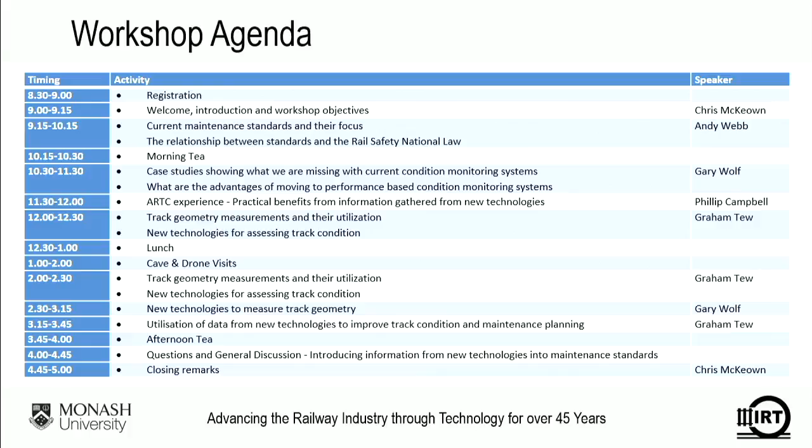Good morning everyone, welcome this morning. I'll try and speak loudly, so if you hear my voice drooping a little, just wave your hand and I'll try to pick it up again.

I've got some slides. Do we have a control? You can use this microphone if you want. Also, do you have a remote? I think there must be a remote on the other side. Just check... No, we don't have one. Okay, so you might have to use this one. I'll hold it because I think I'll have to hand it on to the next speaker.

Okay, so I'm just going to talk a little bit about my function and about the objectives of today's workshop to start with. I won't talk about the program because Ravi's already had the program up.

The Chief Investigator Transport Safety is an independent agency established under the Transport Integration Act Victoria 2010. We investigate rail, maritime and bus safety incidents in Victoria. Rail incidents in particular are investigated under a collaboration agreement with the Australian Transport Safety Bureau, and the reports are published jointly with the Australian Transport Safety Bureau. So we work very closely with our federal agency.

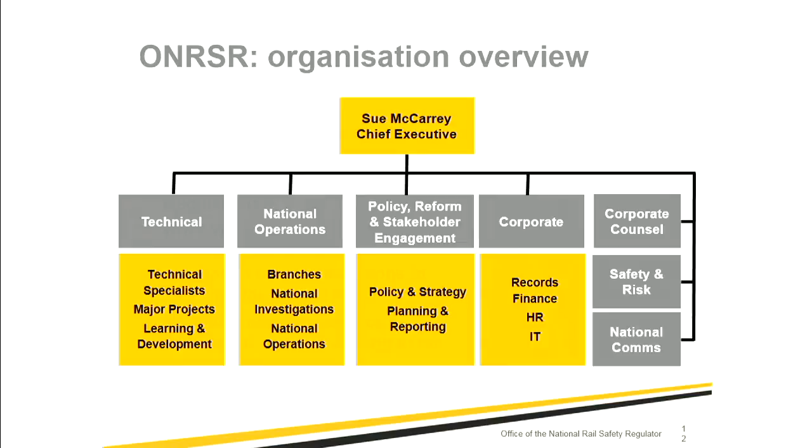So what do we do? Now, there are some key functions that the regulator performs, and these are not functions that we all sat down and thought would be a good thing for us to do. These are functions legislated within the Rail Safety National Law. So the regulator's functions are to administer, audit and review the accreditation regime - that's the process by which railway operators are allowed to do railway operations.

We have to work with rail transport operators, which will be a lot of people in the room here, and rail safety workers and others, to improve rail safety nationally, and conduct research and collect and publish information. We also provide or facilitate education and training.

We're also here to monitor, investigate and enforce compliance with the law, and at times you might see some of the rail safety officers out undertaking audits and inspections. And also to engage in, promote and coordinate sharing of information relevant to rail safety, which is probably one of the reasons I'm here today.

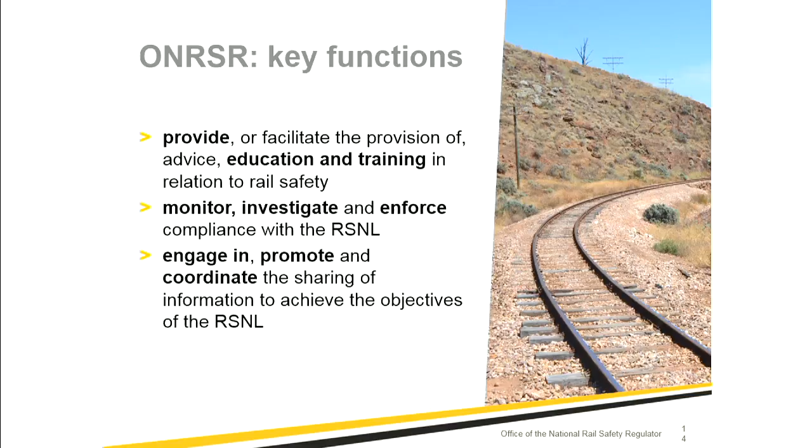So what's our approach? Understanding our approach, I think, is important to put into context the rest of the discussion that I'll be having just now and perhaps for the rest of the day. But the regulatory approach as we deal with industry is...

We aim to be independent and impartial. We aim to be risk-based, where our activity should really be focused on the areas that have the highest potential for creating safety risk, or the highest potential for seeing safety improvement. Our engagements with industry, we hope, would be educational, and we feel it's also important that our engagements, particularly with compliance and enforcement, are proportionate to the risk that is currently being addressed. And we should be transparent, fair and accountable, but importantly, consistent.

And I think that's one of the messages the industry was keen was implemented as part of a national regulator, that wherever you are in the country, the response and the reaction from the regulator should be the same for the same type of problem with the same type of scope.

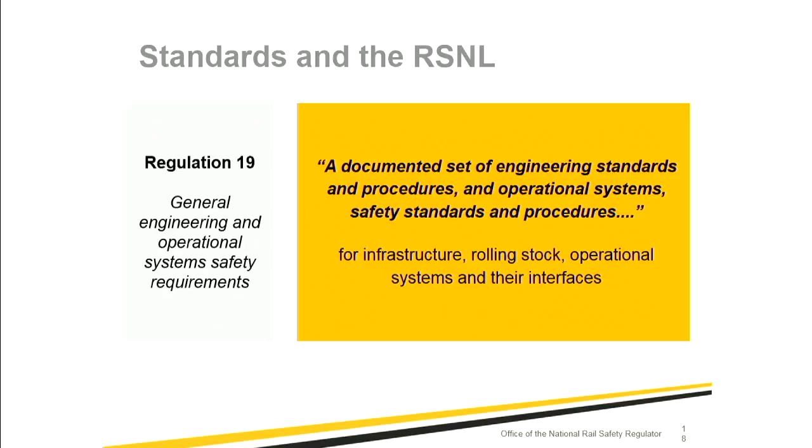And the second half of that regulation moves on from having the standard to describe the what, to having the standards and the process to describe how. So systems and procedures and standards for infrastructure and rolling stock that cover the asset life cycle from design through to decommissioning.

So yes, it's important to have the maintenance standards, for instance, that will describe what you might look at and examine, but you also need the processes surrounding that to ensure that that standard gets implemented and delivered. It's just to think on two fronts how that is done.

So effective standards. What are effective safety standards? Can we take the assumption that standards have been written, we've got all the documentation that we need, and that they comply with Regulation 19? So tick, tick, tick, we're all good to go.

Well, not necessarily. We have to ensure that our standards are effective and are implemented effectively to ensure safety.

And the example I gave at a previous presentation, and apologies for those that might have heard this before, but it's an event that stuck in my mind. But a few years ago, in fact probably many years ago, I was working in Dublin with Irish Railways, and we were delivering a number of things, one of which was level crossing upgrades. So level crossings were being upgraded and all of that was ticking along okay.

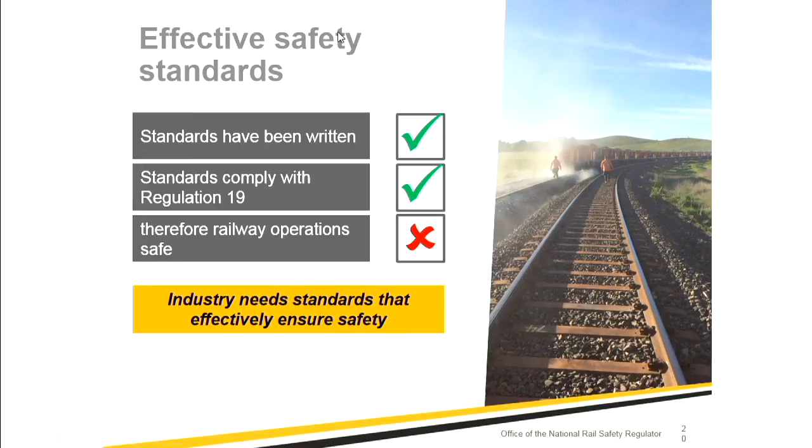So within the week, the correct signs were back out there. But the message there is, you can have the standard, but are you using it effectively? Are you aware of its limitations? Yes, we can tick off that we've got standards that comply with Regulation 19, but that doesn't necessarily mean our railways are safe, particularly if you don't have a colour photocopy. So just think about how effective your standards can be.

But in reality, some of the key features of effective safety standards apply across the asset life cycle. Ideally there's risk-based development behind them, so we can understand, at least from the regulator's point of view, what safety risks might be controlled - there'll be other risks in there too. There should be a clear and accountable development governance to the standard. They should share good industry practice. They should be subject to continual improvement and review, and in so many parts of our professional lives, continual improvement should always be there.

And again, I think that's one of the strengths of forums such as this, where we come together and think about what's out there - how can we do what we're doing better, or can we learn from someone else?

Standards are a useful way of documenting safety so far as is reasonably practicable type controls. And these controls should support the hierarchy of control mechanisms, and standards should also have clear decision-making accountabilities. At times, we need to intervene, we need to make decisions, and it should be clear as to who does that.

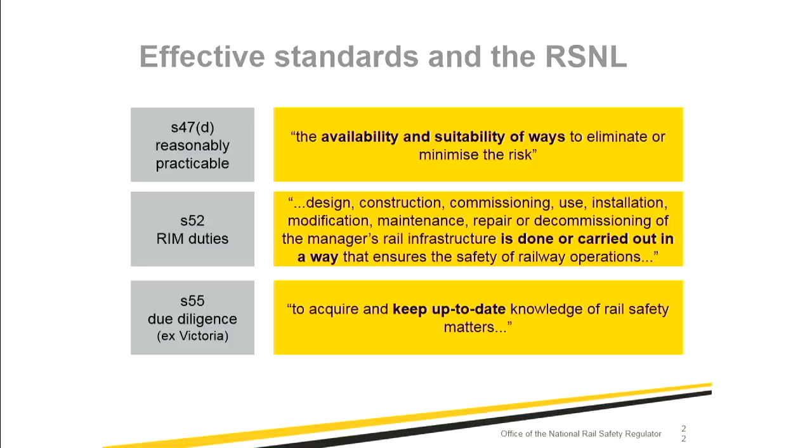Now, from the regulator's point of view, risk there is really safety risk, but I'll admit the world is slightly bigger than the regulator's core interest. Cost, risk and performance - that comes back to the messages behind ISO 55000, the asset management standard. And if you're looking at maintenance, you've got to work out all of these and how you balance them together. Certainly from the regulator's point of view, they're interested in failure consequence and that risk side, particularly safety. But have you thought about the asset's environment? Are our maintenance instructions and approaches efficient for the maintainer? If we're spending a lot of time doing something that doesn't add value, could that time be better spent doing something more useful elsewhere? I think these are the sort of questions to be thinking about.

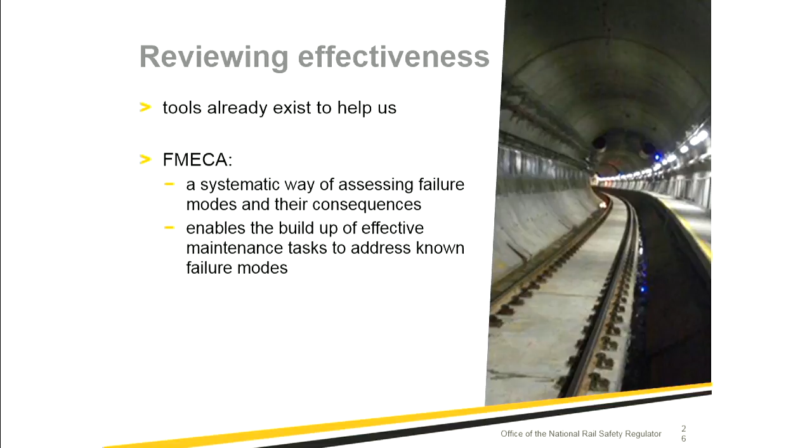So hopefully the slides will work here. It's maybe a bit small. I'll try and talk to them. But there, at the beginning, is really about understanding what assets you have, how they contribute to your business, and what they do. Unless you've got an understanding of that - in effect, the context that our physical assets are in - it's going to be a bit of a struggle to work out what you should be doing to them to keep them safe and reliable.

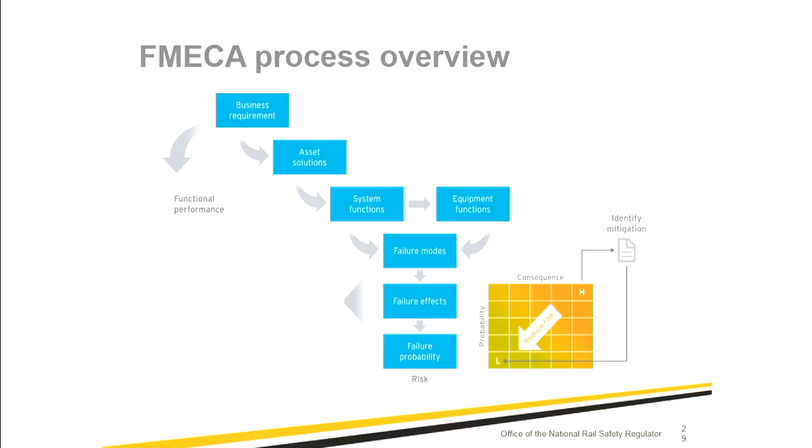So off to the right-hand side there, we can see our typical risk matrix, where if you have a high consequence, high probability type risk or failure mode, you can identify mitigation that will reduce the risk. And in this instance, the mitigation that we might look at is maintenance.

What maintenance are you going to do to reduce the risk of that failure mode? So when we're looking at new technologies, when we're looking at smarter ways of doing maintenance, how are we reducing the risk of failure? That's key, I think, to what we should be thinking about.

And when you've started to identify these things, then you can find operator actions, maintainer actions. You may have to go back and redesign. But the operator and maintainer actions is our maintenance plans. And going through that systematic process then helps you identify the maintenance activity that you may wish to do.

So a FMECA can help support safe assets because it helps you identify maintenance activities, helps you identify operational activities you should do, and helps you communicate the assumptions behind existing practices, because it gets you systematically thinking about things.

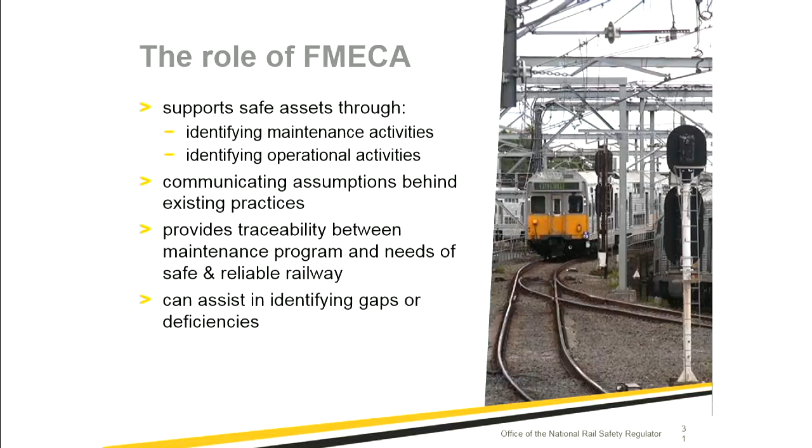Again, asset management, I was alluding to the how of doing maintenance. We have asset management plans, and asset management plans will cover things such as the management of risk, knowing or being comfortable that our asset hazards are identified and controlled.

Some of the control there can be in the documentation, that we have instructions and processes to ensure that our maintenance is delivered. With our actual assets, that their safety performance measures are known and managed, that we've got training and instruction for our staff, and that everyone is competent in what they do. That is, in a quick summary, what might be part of an asset management plan.

What maintenance standards and instructions will contribute to. That asset management plan is a requirement of a safety management system, which is a requirement under the Rail Safety National Law too. So again, there's this connection back that what you're doing today, what you're thinking about in terms of maintenance instructions and standards is fundamental to ensuring that you deliver a safe railway that is compliant with our national law.

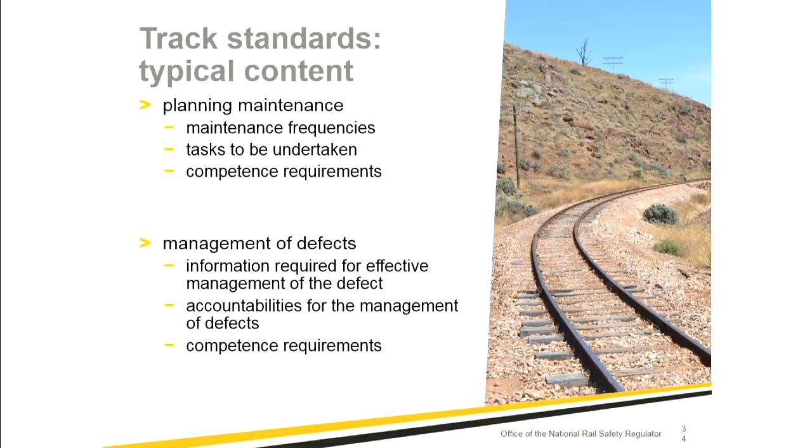So, safe delivery. I didn't just want us to concentrate or just have that focus purely on the technical nature of it, but I do appreciate that's going to be important for today. But we do need to think about how it fits in overall.

As a railway, we may be track engineers today, but there are a whole host of disciplines out there, and the railway is a complex system. A wide variety of disciplines, an even wider variety of technology, and assets at a whole stage throughout their life cycle. And we need to be managing the safety risk, as I've said. You need to be managing condition, you need to be managing interfaces, budgets, people. The whole thing is complicated.

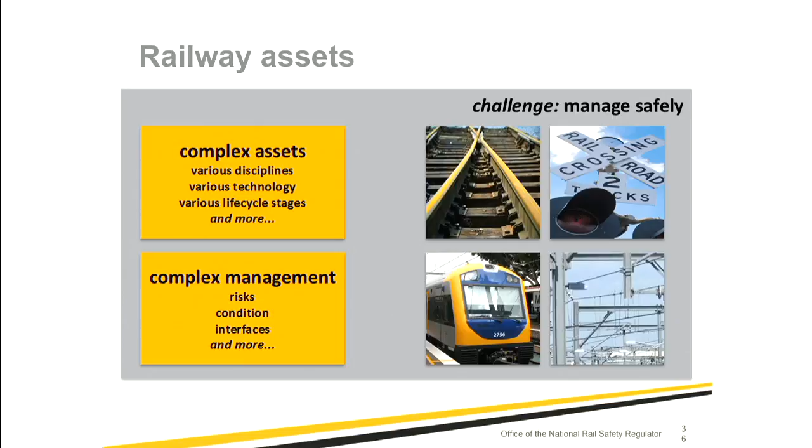And how do we do that safely? It comes back to our asset management and asset planning approach.

So a safe approach, yes, I think it's appropriate that you focus here today on track standards and the engineering behind them, but we do need to think that all assets have to work together, whatever discipline an engineer is responsible for them. We have to be very aware of these interfaces, and we've got to think of the railway acting as a system as a whole.

And a safe approach includes understanding risk, being aware of what the safety requirements are. That doesn't mean just legislative requirements, but what are the safety requirements on your asset? What performance does your asset need, if you're looking at maintaining it a different way, what are the safety requirements? What's the rest of the railway expect your asset to deliver?

And stakeholder requirements, which might come back to some more of the business drivers, as I was explaining earlier, that cost, risk, performance juggling act.

So the asset life cycle is worth thinking of too, because when we're looking at maintenance and asset life cycle, there's lots of ways of drawing that. Again, I think this one's taken from the Asset Management Council. But you plan, you design your asset, you acquire it, you build it, and then you operate and maintain it.

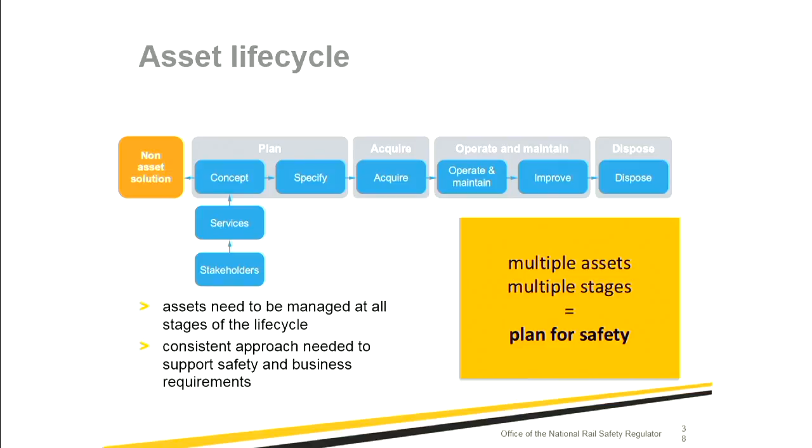Another example I thought I would share with you. This was a story where a coal train was leaving a yard empty. A handbrake had been left applied to one wheel, and the operator failed to spot the defect.

These things happen, such is life at times. So the train wheel slipped along the track as the train progressed empty to the coal yard. And when the wagon was filled with coal, the wheel locked on the return journey.

So the locked train wheel caused the laden wagon to derail at a junction. The resulting derailment damaged the rail system as a whole. So the wagons were damaged, track was damaged, signalling was damaged.

Operational disruption was somewhat scary. Ships were delayed at port. The estimated consequence of that one failure was about $10 million.

That was based, that's a true story, but the scenario happened twice at the same location within one month.

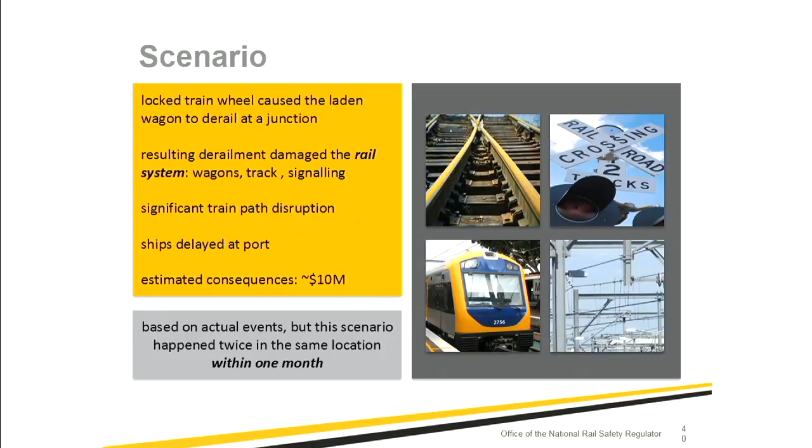And it's thinking about what are we doing in terms of maintenance? How are we responding to these items?

So there was a new piece of kit designed to detect should a wheel be locked. But one of the messages here, I think, is when you're looking at your assets, a failure in your asset

can have consequences in other people's domains within the railway system. A failure on a wagon

created problems for the rolling stock engineer, created significant problems for the track engineer, created problems for the signal engineer, and did not make the operations manager a happy man twice in one month, assuming we are ever truly happy.

But our approach to maintenance, and again, when you're thinking about maintenance today, think about how reliable and safe track assets contribute to the rest of the railway, and not just within the confines of the track engineer.

So nearing the end, we also need to be aware of how everything fits together, how you manage your asset. Know the interfaces between assets, between asset groups.

Understand that maintenance and your standards should be supporting your assets being fit for purpose.

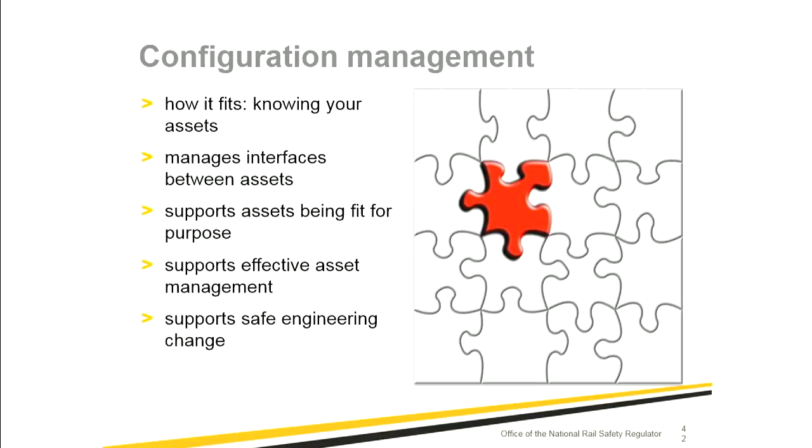So, know your safety requirements, know how your requirements are managed throughout the asset life cycle,

know how you manage your asset risks, ensure you've got the information that you need, and how you interface with other parts of the railway.

So that really brings me to the end of what I was looking to talk about. We've had a quick skip through the ONRSR, who we covered, the changes coming up in New South Wales and Queensland about to join us, what the regulator's here to do.

But I hope I've given you a foundation for the rest of the day to have at the back of your mind that what you're doing is important, it's critical for compliance with rail safety, and ultimately that's why we're all here.

And some of the things to be thinking about in terms of maintenance standards, to ensure that maintenance standards and how we do maintenance is effective and safe. Thank you.

Just put this slide. Can I turn off these screens so I can just do it here? The thing is, these screens are linked to that, so you have to look up there. Okay, so, beautiful, so you have to do it up front if you don't want to. No problem, I had trouble because it was echoing, yeah. You've just got to make sure the microphone's not... see, we're getting feedback from these speakers. Maybe if you step back towards the wall. Yeah, maybe back there. How's that, try that? I think you're still getting feedback. No. No feedback? No, no feedback. If you stand good there, back there's fine, no feedback, isn't it? No feedback from there, it's much better. Yeah, it's still yeah. It's poor acoustics in this room, they can't do anything about it. But there is a microphone here, try this one, but the only thing is you're going to be blocked off by that. Yeah, and you know, when the speaker stands behind here, you can't see the speaker. How's that, is that better? Yeah, that one down, oh, it's a design that somebody has done without even realizing. How is that? Yeah, so you might be able to.

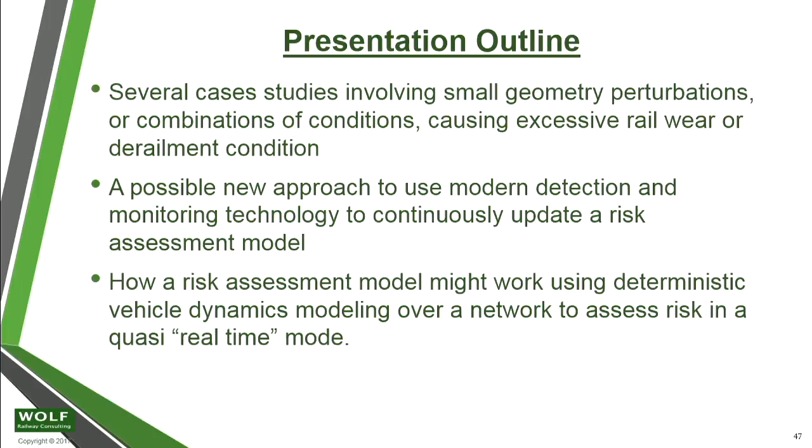The first derailment I want to show you was a loaded box wagon operating over a highly elevated curve. I won't get into all the reasons why the curve was highly elevated, but it had something to do with past experience with passenger trains on that corridor needing higher elevation for their speeds versus freight speeds, which is a common problem in many areas.

The curve elevation reached about 7 inches, or 178 millimeters—you'll see in a moment with the graph. The curve also moderated at the same location, so we had an increase of elevation and a lessening of curvature. The train was operating at 10 miles per hour, roughly 15 clicks, considerably under balance speed or design speed for the curve.

The higher elevation was due to pumping—mud, obviously—from the low rail side. So when the low rail goes down, the high rail goes up in relative terms, and the elevation increases. That's what was occurring. Also, the curve had corded in during the winter: when the rail contracted and the ballast was weak there, it pulled that curve inward. That's why the curvature changed as well.

As I said, none of the track conditions constituted a regulatory defect. Of interest, the first derailed car in this train—maybe 50 or 60 cars—the one car that came off at this spot had a slightly off-centered load. Now, we can sit back and say, well, there's the cause—the load was off-center, an inch or two from center of gravity. The problem is, that's a reality we should recognize in our world. When we set a standard, we should accommodate an off-centered load—not to a great degree, but minor offsets ought to be considered in how we look at standards, and not assume every wagon coming down the railroad is perfect. I think that's one of the fallacies when we look at standards.

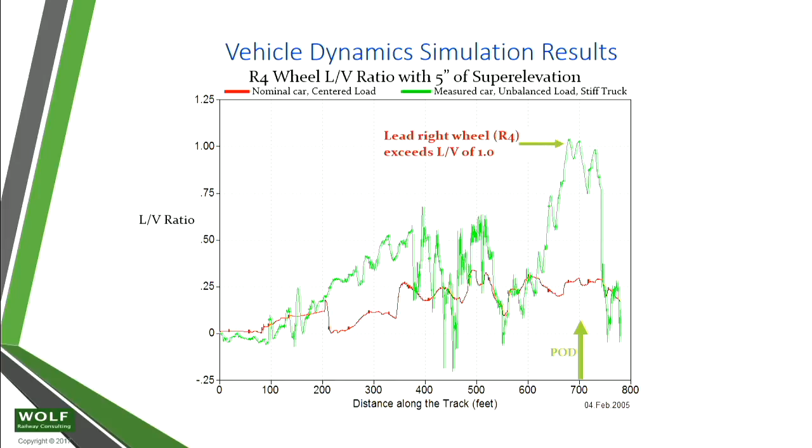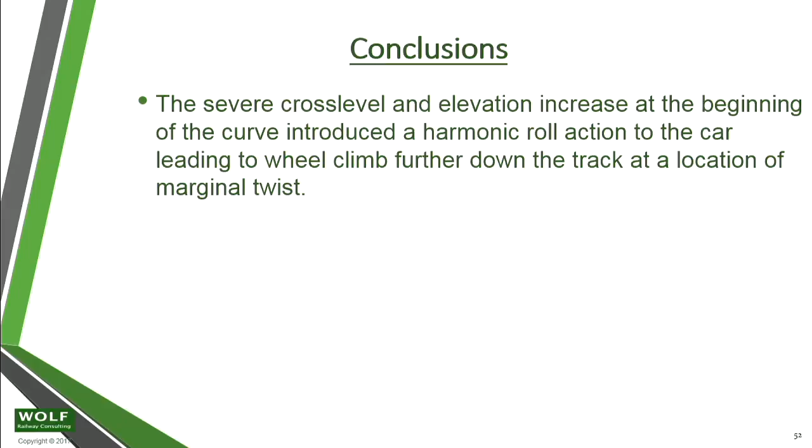So the severe cross level and elevation increase introduced a harmonic roll action leading to wheel climb further down the track at a location of marginal twist. If the car did not have an unbalanced load, the derailment would not have occurred. And if the curve had been elevated to a nominal 1 inch, the derailment would never have occurred. 1 inch elevation would be normal for this degree of curve and a 10 mile per hour speed.

So here we have a condition where we met the standards, but we put ourselves at an unacceptable level of risk, I think. So combinations of conditions, none of which are condemnable, can lead to derailment.

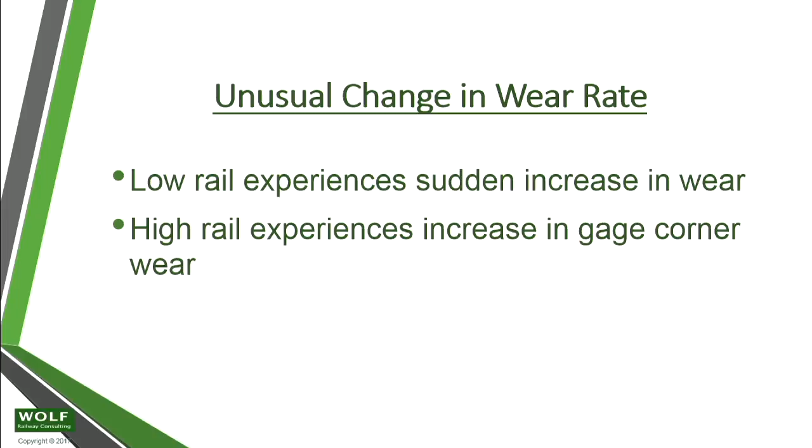Now this is not a derailment, but we did some work for a particular rail operation looking at rail wear, and in looking at some data we came across the fact that at one spot we had the low rail of a curve experiencing a sudden increase in wear, and the high rail gauge face also experiencing a sudden increase of wear. This was in a curve, and all of a sudden at one location we had these two blips of increased wear rate.

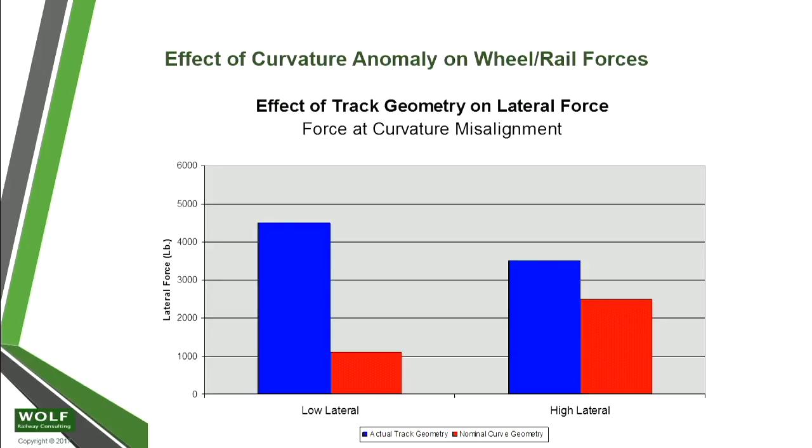So we ran some simulations with the vehicle dynamics model, and here's what we saw: with the actual track geometry, with the curve variation right there, we saw a large increase in lateral forces on the low rail, as well as the high rail, over what I'd call normal geometry, smoothed out without that abrupt curvature change. And by the way, that was not a regulatory defect either - it met all the standards, but it caused a huge degradation of our asset here.

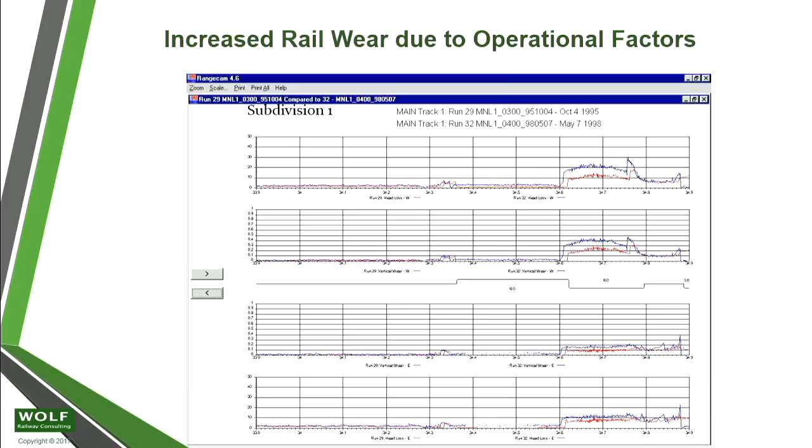Here's another case where we were looking at rail wear conditions, and all of a sudden we noticed in a certain area over several hundred meters a rapid increase in especially the low rail wear, head loss occurring over 2 successive intervals of measurement. And also in concert we had a number of areas of rolling contact fatigue on the low side of the curve. So we wanted to take a look - why did that area stand out in its wear rate? What was unique about it?

What we found was it was on a downslope, loaded trains coming this way, and they were often slowing in this region for a meet at this crossing loop right here. So trains were slowing down coming into this meet location, and the curves back up here were experiencing trains operating significantly below the planned speed limit.

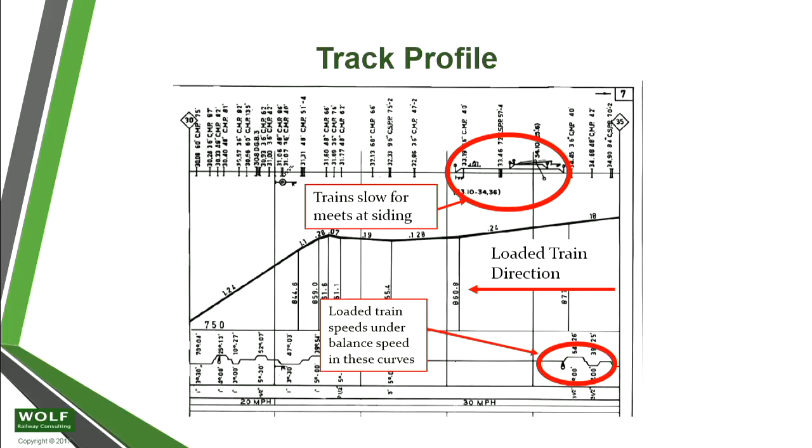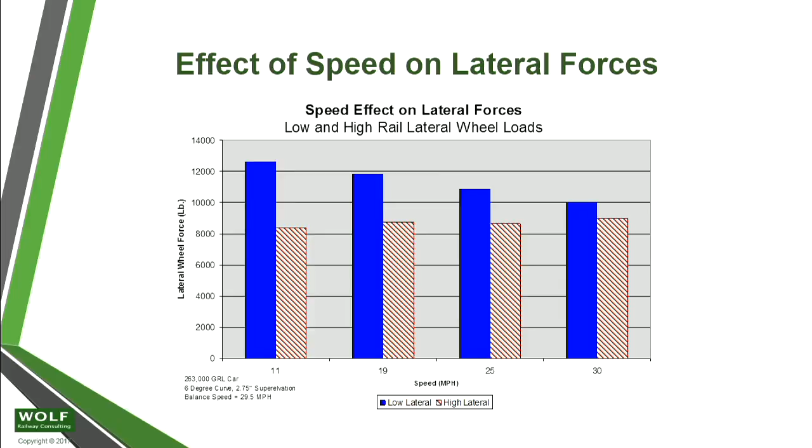It also affected the lateral forces. When you operate significantly under balance speed, especially on the low side of the curve, your lateral tread creepage forces increase with increased normal force, and that explains some of the tread wear issues as well.

So we have two case studies here. One shows the direct influence of a sudden, non-condemnable change in geometry that causes higher than normal wheel set forces and wear. The other shows how train operating parameters can also influence the condition of our infrastructure if we're not taking that into account.

These studies show why we can't ignore even subtle changes in geometry, or we risk the development of adverse rail degradation. The problem is we're not detecting these changes. The geometry car goes through, gives a clean bill of health, no problem — but then we see the results of some of these changes that we're not picking up.

This one involved three high-speed box wagon derailments. These were 60-foot wagons, roughly 20-meter wagons with swing motion trucks. They were derailing at high speed, about 80 miles per hour, which would be roughly 125 kilometers per hour. The three occurred over about a four-month period.

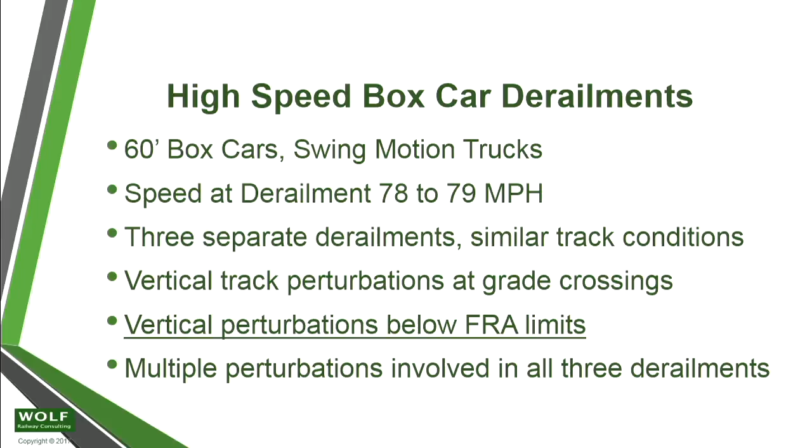They had similar track conditions — vertical perturbations near level crossings. Importantly, they were below the FRA limits. Geometry cars didn't flag them in any of the three instances, yet we had significant derailments at all three places.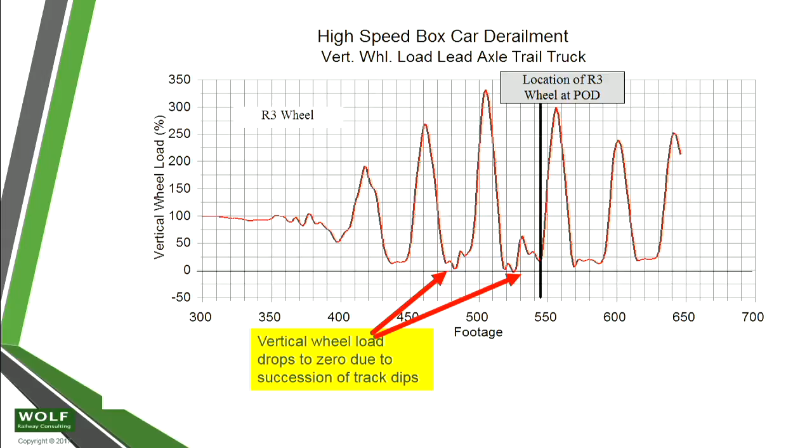So again, small track surface defects, borderline regulatory defects, multiple perturbations in a row — a single perturbation would not cause the derailment. You need that combination. While the static measurements may meet the standards, the dynamics do not. And again, lack of corrective surfacing or grinding leads to these worsening conditions.

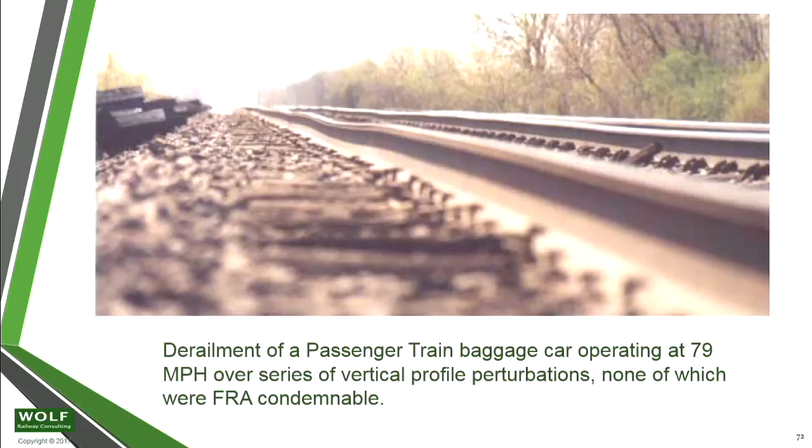Here was a passenger train derailment, a pretty famous one in the U.S. that made the newspapers about 10 years ago. This is a view — I'm laying down at the level of the track trying to shoot these vertical perturbations. We had three in a row. The train was operating at about 80 miles per hour, 125 or so kilometers per hour. It hit three of these perturbations, and although they look kind of ugly here, they were not regulatory condemnable.

So we had these dips, about a 1 3/4 inch maximum was the worst dip, but the regulatory maximum allowable was 2 inches. So again, it wasn't flagged for either vertical or cross level. We were close, but not in the condemnable range.

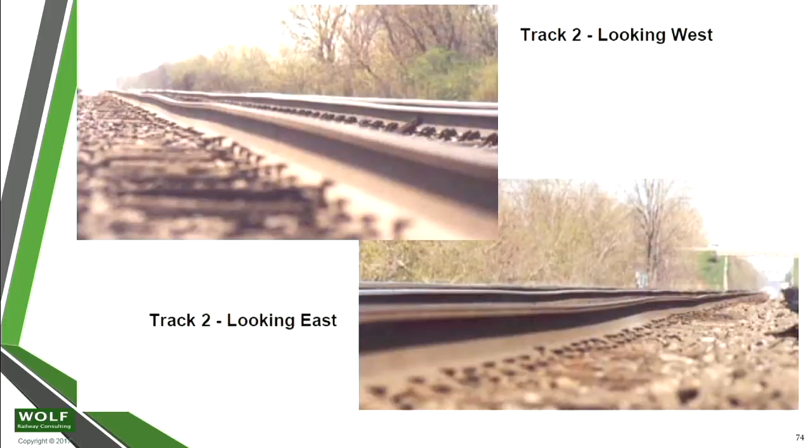And here again is looking both east and west of the site, and you can see the vertical top looks pretty ugly, but it met the standards.

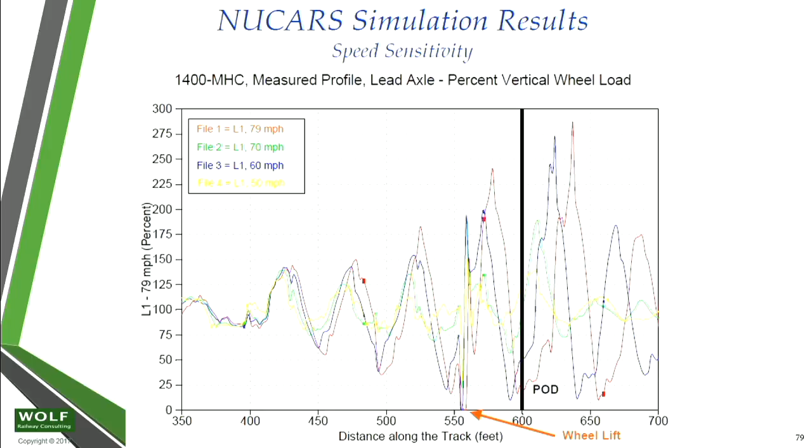So again, not to beat a dead horse, but we had these 4 dips right in a row. A singular dip would not have caused this derailment. The cross-level twist on top of it. So here we had combinations, again, of non-condemnable measurements in combination with speed initiated a major derailment of a passenger train and numerous injuries. Not a pleasant situation by any means.

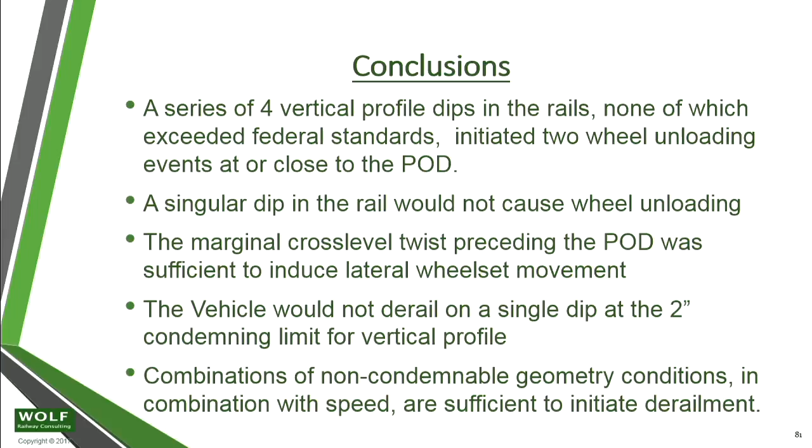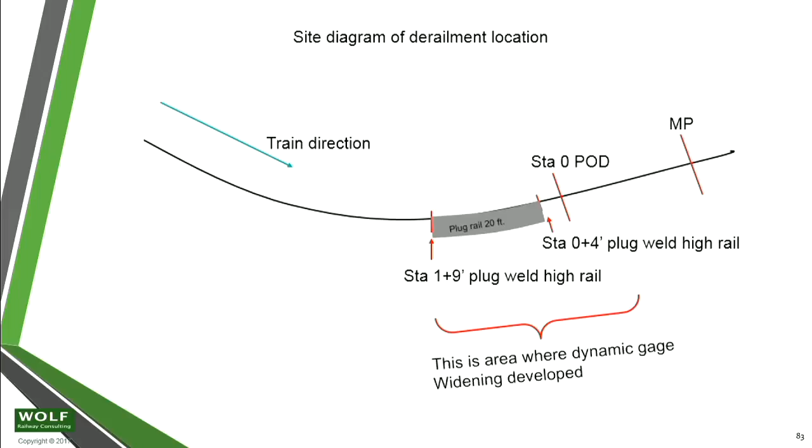So, right where we had this plug rail, right in here, coming out of this curve, we started to see dynamic gauge widening. And right up from about here into the point of derailment, the gauge started dynamically moving. This was on wooden sleepers, and you could see the plate movement that was occurring. I'll show you some pictures.

The nominal alignment using a 10-meter chord roughly was 3/4 of an inch. Converted to a 20-meter chord, it was about a nominal 3-degree curve, which is, what would that be, 600 some meters maybe? About a moderate curve.

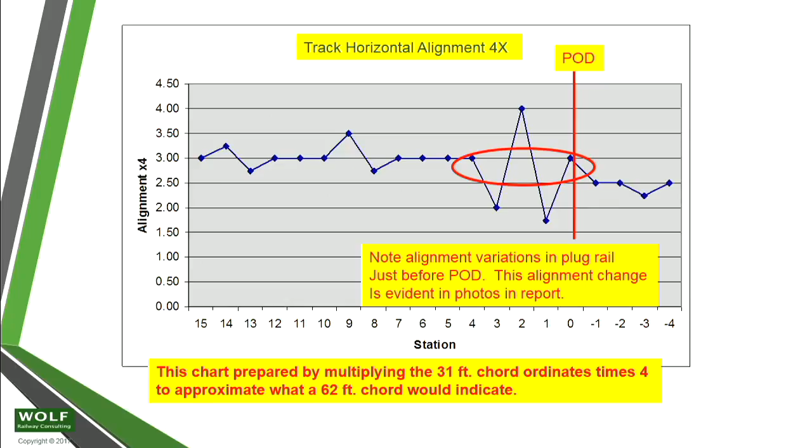So we had good track data, but we see this alignment change showed up on the chord measurements quite clearly here, right before the point of derailment and in the area where the gauge started to widen out. And so people thought, well, what the heck does an alignment defect have with gauge widening? It was very moderate. It wasn't significant by any standard that we had. So why did we get gauge widening at this site?

Now here's another interesting thing. Wheel rail contact geometry. How many of you at derailments go out with a MiniProf or another instrument and take wear profiles? I'm curious. Anybody? Just one, two?

Okay, couple questions. Mr. McHugh, do you guys use rail profile instruments to measure accurately? We don't have them, but we generally get that. Yeah, you can get it, okay.

A lot of people overlook the importance of wheel rail contact geometry. To be honest, 30, 40 years ago when I started this stuff, we didn't really look at it much because wheel loads were lighter and conditions were better. But now as we've increased axle loads, upwards of 38, 40 tons in the U.S. and North America, wheel rail contact becomes extremely critical, especially in curves, to promote good steering.

What we found here, just to summarize, we don't have time to explain why, but we had a very serious two-point contact because on the wagon that derailed, we had all new wheels operating on a curve-worn high rail, creating a two-point contact condition which leads to essentially zero steering moment from that wheel set. So when you think about why the gauge started widening, it wasn't this one wheel that did it. This has been a successive buildup over the prior 6 weeks. Many other wheels came through with similar contact geometry that probably did not steer well, which magnified the lateral loads in addition to the alignment defect.

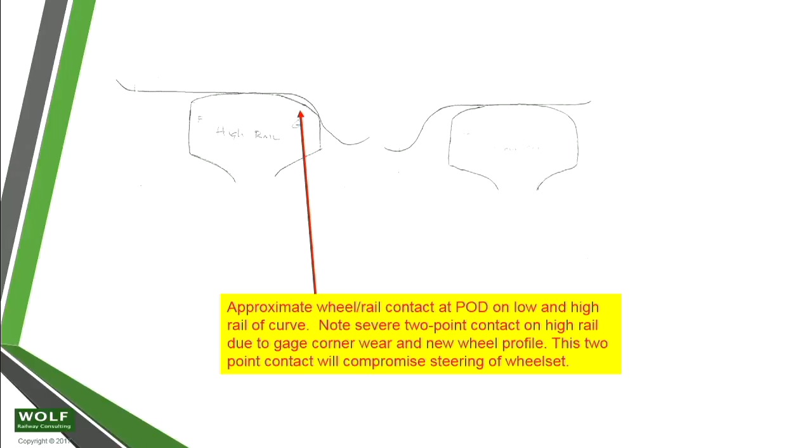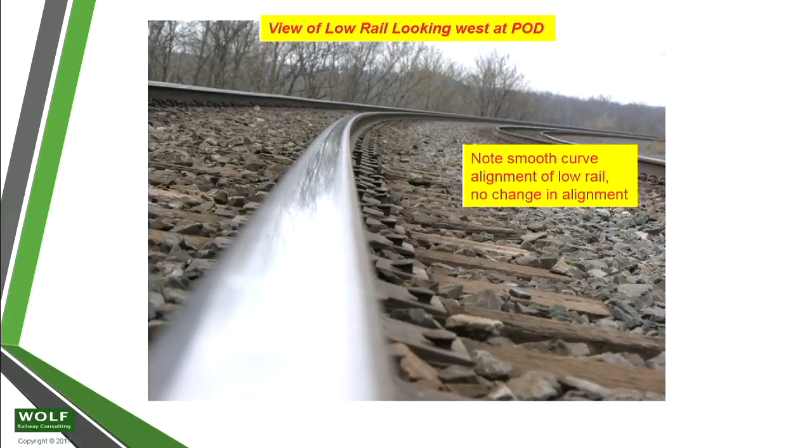Again, looking back at this alignment, you can see the quick step change right in this area of the plug rail. This is where the dynamic gauge widening occurred, where the plates started pushing on this side. Look, that is the low rail. Notice a very smooth geometry on the low side of the curve, which you would expect, so no problem there, just to contrast it with the high rail.

Now if we look down on the plates, right where this started, here's the plug weld, thermite weld right here. Notice we started seeing plate movement, dynamic plate operation here. As we got further along, it got worse. When we got up here, we were seeing upwards of the worst, about 2 inches of dynamic movement on that sleeper.

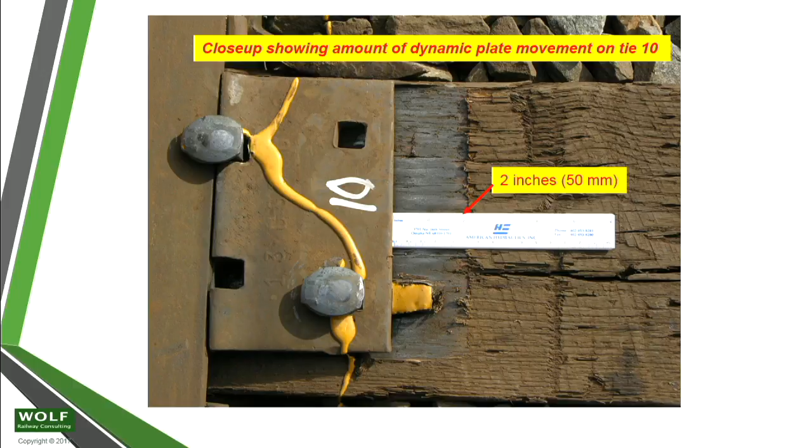This curve had been measured by a geometry car about 4 or 5 months earlier. The gauge was perfect, no problem at all. They put the plug rail in about 6 weeks before this derailment, and we believe this was the degradation that occurred over 6 weeks in gauge because of a minor, non-condemnable alignment kink.

We also were breaking spikes in the curve, dog spikes, cut spikes, whatever you call them here in Australia. I'm holding a bunch of them. We had buckets full of them in that curve where those plates were moving, putting those spikes in bending, which caused a fatigue crack down on the shank.

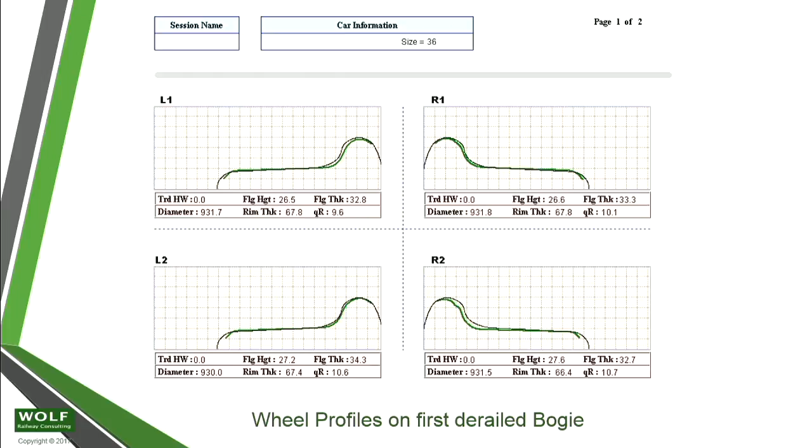Showing you some of them there. These were the wheel profiles on that car that derailed, showing essentially all new wheels, which is a normal condition, actually desirable. No defects were on the wagon.

We did a very good teardown on that wagon. Looked at all the bogie pieces, took them all apart, just couldn't find anything mechanical wrong with the wagon other than it had brand new wheels.

So we did some simulation modeling, and we particularly looked at the contributions of curve alignment and two-point contact, and to a lesser extent curve elevation, on lateral forces and L over V's. I'll show you some pictures here.

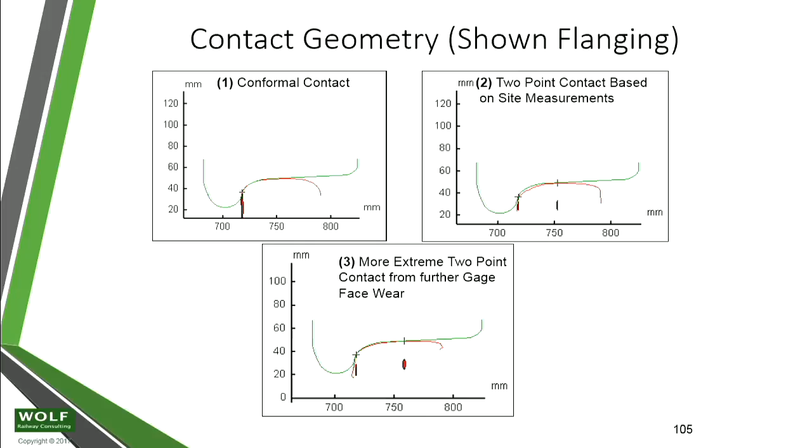These were the three contact geometries we simulated: conformal, a moderate two-point, which is essentially what the on-site measurements gave us, and then we looked at a more extreme two-point contact just for comparison.

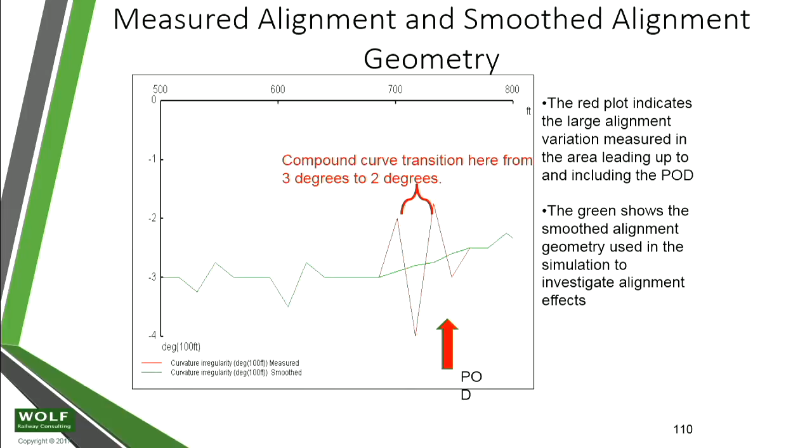And I'll get to this. We also looked at smoothing the curve out. Here were the alignment kinks. We also looked at a more smooth curve. We compared the two, and we saw again a pretty significant change in alignment improvement, from a 0.4 truck side predicted right at the point of derailment down to about 0.27, 0.28, maybe 0.29. That's a pretty significant improvement.

So we see these subtle changes in geometry had a large influence, and I won't bore you with all these.

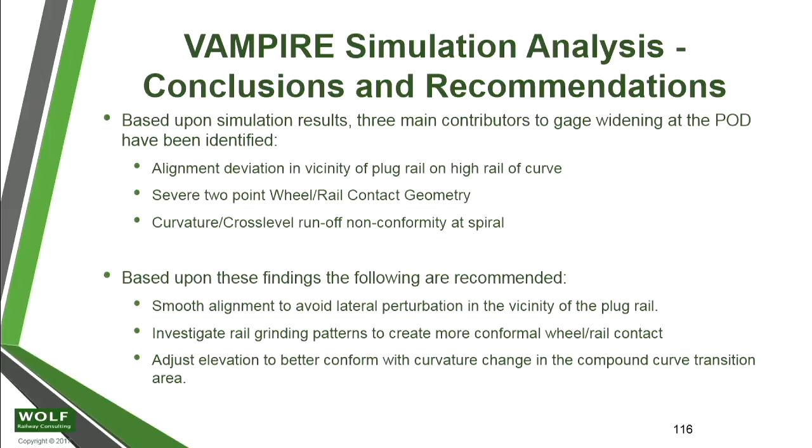Smooth alignment was recommended to avoid lateral perturbations, and we also recommended to the client rail grinding to remove that significant two-point contact for newer wheel profiles. They hadn't ground that rail for some time, which goes back to wheel-rail interaction and its importance in generating lateral loads. I went through those quickly, but wanted to give you a flavor leading into what I think is a better system.

What we've learned from these accidents is that significant, yet not condemnable, variations in track and rail geometry can lead to degradation of track geometry and rail life, i.e. increased rail wear. And if you're wearing the rail, you're also wearing the wheels. So for those of you operating closed loops, it's a system out there—if one's wearing, the other's wearing too.

We also learned that in those five or six examples, a series of multiple perturbations in a row, none of which are singularly condemnable, can directly cause derailments. That's part of the problem with condition-based geometry measurements. We look at the rail, measure cross-level, gauge, alignment, surface, profile, left and right rail.

It looks good. We walk down 20 meters, do it again, and then walk down and do it again. We take these discrete looks at the rail and come back saying everything's great. But we don't look at the resonance created by a series of certain perturbations and the distance between them when we take these discrete condition measurements.

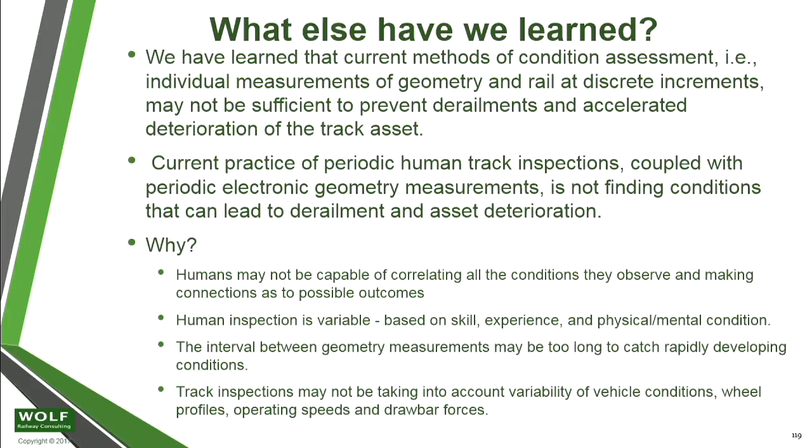So what's needed moving forward? This gets to the conclusion of my talk, the heart of it here. I think we need to turn more to performance-based risk assessment. That is, taking into account the types of vehicles that may operate over that track, including potential defects, and the speeds that they may operate at.

I also think we've got to start using autonomous and automated geometry and rail profile measurements that are out there running around frequently measuring all these parameters, or at least a lot of them. I know Monash has, what, 80 or 90 instrumented rail vehicles operating in Australia now? Yeah, 80%, and they're out there every day. I sat in the room the other day watching one on the V-Line moving along, picking up things. We need to feed that data into a performance-based model that can look at how the track is changing.

We need a method to combine these continuously updated geometry data points in some kind of semi-automated simulation environment to make performance predictions for a range of vehicle types and speeds. We also have to look at updating possibly track regulations based on this methodology, and I think regulatory incentives to move in this direction by relaxation of mandated labor-intensive and safety-sensitive weekly inspections.

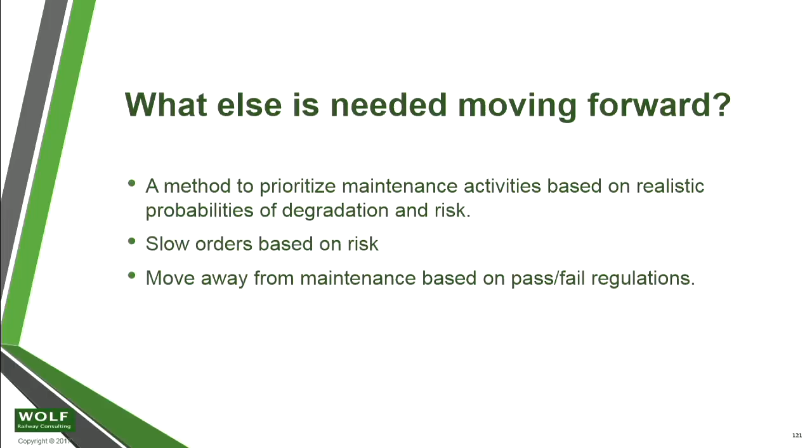We can't fix every mud spot. We need a method to prioritize which ones are critical and which ones are trivial. I'll talk about that this afternoon, but that's kind of what I'm saying here. We need slow orders based on risk, not just conditions, and we need to move away from maintenance based on pass-fail regulations and more toward a performance-based system, at least to look at it. Can we do it?

Yeah, absolutely. I've done it, okay? We've done model studies for a number of clients where we've used these kinds of track inputs from geometry cars on a quasi-real-time basis. We predicted vehicle performance and showed them numerous sites that need remediation that were not flagged by regulatory inspections, and we've had great success. It does work, okay? So I'm not talking blue sky here—I've done it, and it's very cost-effective, I think.

We need a cultural shift at the railroad and regulatory level as well. We need to eliminate this kind of thinking—and I hear this a lot, Robbie and I were talking about this also this week—the thought that I'd rather not know about these problems, because once you tell me, it means I've got to fix something. This notion is prevalent in the U.S. People would say I'd rather not know than have to react to it, because once I know about it and then something happens, now I'm really in trouble, okay? So it's sort of the 'I'd rather bury my head in the sand' syndrome than to know what's out there. And we really have to move away from that—that's not a proactive way of managing our infrastructure.

We need to realize that new and different data may be needed in our measurements. Maybe we're not getting the right information. We need better data mining. We need corroboration between the vehicle and the operating departments. Folks, it is a system.

I think Mr. Marich has proved this over the years. I've read a number of his technical papers. He talks about the wheel-rail interface as a system continuously. We need to take that to heart. It's not just the vehicle guys, it's not just the track people, it's not just operations. It's everybody looking at this as a system problem.

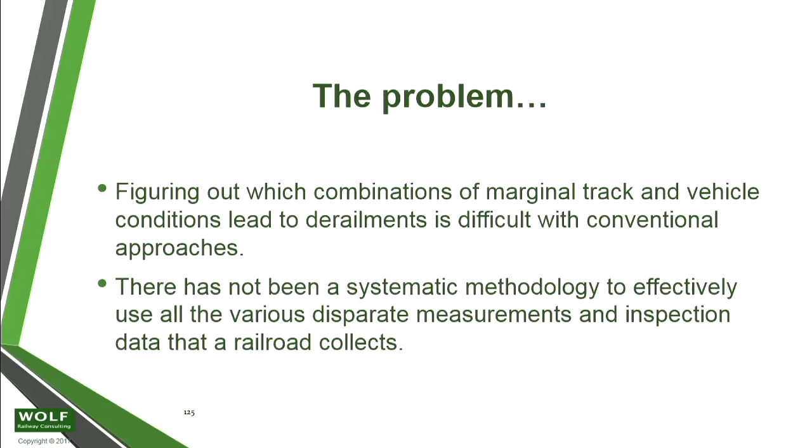We've had past approaches and techniques for derailment risk assessment, including neural networks and reliance on geometry, comparison to regulatory standards. Some people have tried probabilistic modeling. Some have used simplified first-order models of vehicle performance, very rudimentary models that can run quickly in a computer environment.

But yeah, that was important in the 1990s. In 2017, we have massive computing power. We can do stuff we couldn't do 10 or 15 years ago, and we can do it cost effectively.

The other big problem is our past attempts at risk assessment don't take into account external drawbar forces and coupler angles. That's another big one.

I kind of grew up doing a lot of longitudinal dynamic work, because on our railroad we believed if we kept the longitudinal coupler forces low in buff and draft, we would reduce our derailment risk and get the train over the road even with those marginal vehicles. And that is true—we were successful at it. We kept our drawbar forces quite low.

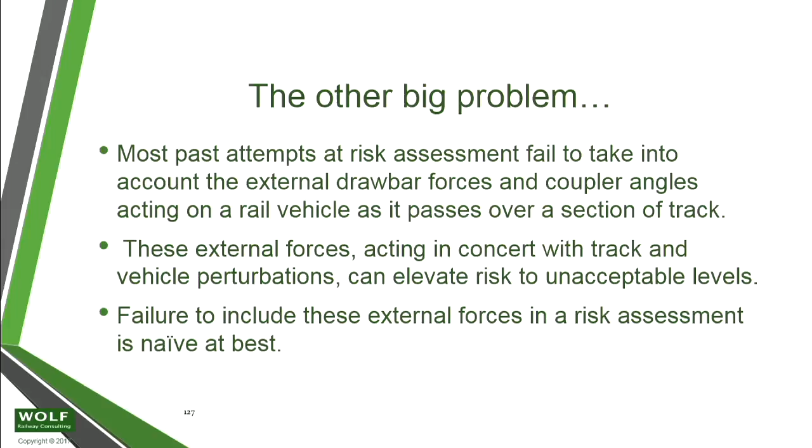But you have to figure out or know, have some idea what those drawbar forces are in a certain area of the track. When you're going up a mountain grade and you have tremendous draft force, you may not tolerate the kind of geometry perturbations you can tolerate on the flats where the drawbar force is low. Or when you're coming down grade and you're in compression, again, same thing—you may not be able to tolerate certain things.

So we must take into account all relevant risk factors: our measured track conditions, possible and likely vehicle conditions, the most likely predicted in-train forces that are going to occur along the section of track, and the speeds and types of wagons and marshalling of the wagons that we've got to deal with.

We have to also create a relevant magnitude of the risk factors and the probability of factors occurring at some point in time or some point in the track, looking at all this stuff again as a comprehensive system.

So the future simply is this: use an engineering deterministic simulation model like Vampire, NUCARS, Simpack, or Universal Mechanism to predict actual vehicle performance over a route, using the measured track parameters received from our autonomous system at various speed regimes, with predicted drawbar forces for that area of the railway. So plugging in all these components, the external drawbar loads, the vehicle types and conditions, the relevant speeds, and the geometry measured out there on that section of track.

The next step is to compare the actual applied L over V ratios to the track and wheel set against the calculated threshold for wheel climb or rail rollover.

Let me step back. We have to understand that some areas of the track have a lower or higher threshold of derailment than others. If we look at the two main outcomes from drawbar or wheel set forces, at the top you have wheel climb.

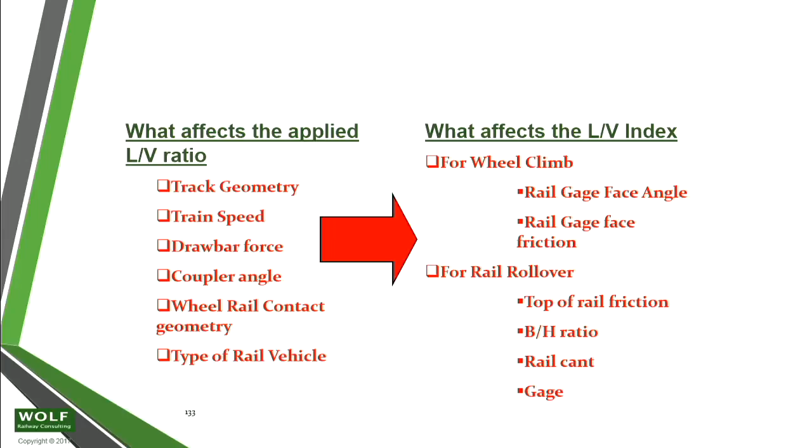The other thing that can happen is rail rollover. Rail rollover is a function of top of rail friction, the base-to-height ratio, rail cant, and gauge conditions at the site. So again, for rail rollover we have similar parameters we have to be aware of when assessing our track conditions.

So in this section of 10 kilometers, are we lubricating? Are our lubricators working, or have they been turned off for 10 years? That will tell us right there a risk factor for rail rollover.

Do we have canted rail? Do we have differential cutting, where the base of the rail on the outside is lower than the inside? Pre-existing rail cant sets you up for rail rollover and lowers the threshold. So with geometry cars measuring rail cant angle and high-speed tribometers measuring friction, you can throw that data into the model as well.

Let me step back here and say, the question is, how do you get longitudinal forces? How do you know? There are two ways. One, the car that Monash has measures drawbar loads directly, giving you a real-time sense of the real drawbar forces along the track at every interval. That's a great way of doing it.

Or you can use a deterministic simulation model like TOS or TOES. Universal Mechanism has a longitudinal module as well. I was talking to somebody, Ian, at break, and I have some reservations about it currently, though I think it will get to a more refined point in the future. So we have tools out there that can predict the longitudinal forces.

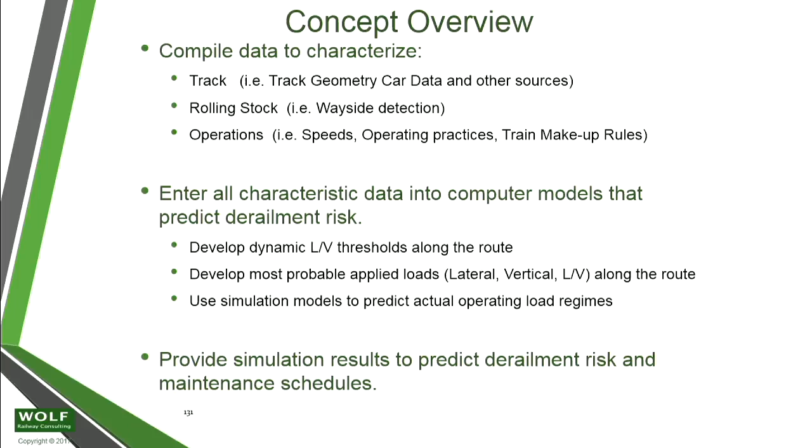So the concept overview is this: compile the data that characterizes your track using track geometry car data and other sources, your rolling stock through wayside detection, and your operating parameters such as speeds, forces, and operating practices. Enter all these characteristics into a computer model that can develop dynamic L/V thresholds and the most probable applied loads laterally and vertically, and use these simulation models to predict the actual performance of various vehicle types along that route under different load regimes. This will provide a derailment risk assessment and can also be used for maintenance planning and remediation.

If you look at the universe of derailment causes, there's five or six big buckets there, and we're talking about data on most of these. We have derailments due to excessive drawbar forces, various track geometry-induced causes, and track integrity-induced causes like broken fish plates, broken rails, broken frogs — things that break, catastrophic failures, which are often driven by stuff here.

We're learning — there's been a number of research papers in the U.S. where researchers have found a direct correlation between geometry defects and broken rails. Because when you allow the rail to start bending up and down a lot, you cause small incipient cracks to start developing.

Where do defects occur most likely in the rail? Where do you find most of your defects? In the head, right? At the top of the rail — detail fracture, transverse defects, verticals, etc. They're in the top, that's where most cracks develop. Oh yeah, we get some base cracks, but 95% of them are in the head of the rail.

So when you push the rail down, is the head in compression or tension? Compression. Do cracks grow in compression? So why do we have cracks? It isn't this that causes them, it's the wheel coming in and the upward bending moment the rail experiences if it's not adequately supported. You watch dynamically as the wheel comes in — the rail goes down, but it's also doing this. So you get a negative downward bending moment, and you get upward bending moments as well. It's those upward bending moments that put the rail in tension and can develop crack growth.

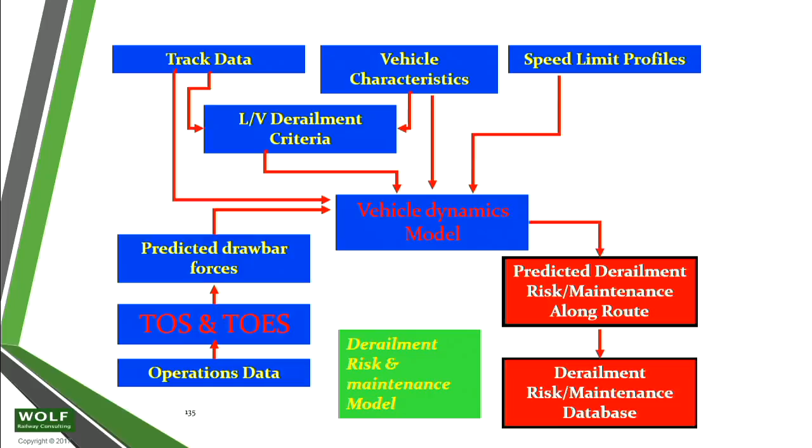So here's a block diagram of what I propose. We will gather track data with our various collection methods. We will also gather vehicle characteristics, and develop an L/V derailment criteria or threshold based on the equipment and the track. We will also use operations data or tonnage prediction to get drawbar forces, plus our speed limits, and we will feed this data into a vehicle dynamics model like Universal Mechanism or Vampire, simulating these vehicles over this track at these force levels and speeds to get a predicted risk or L/V risk along the route, and also a maintenance database.

So what are some of those sources of data? This is just a universe of some of the things we have available now. To characterize the track, we've had track geometry cars for years, putting out data every foot along the way. We have rail profile and cant measurements now, high-speed tribometers for friction, and gauge restraint measurement systems that apply loads.

Are those used much in Australia? Don't use those? Well, they're both effective on wood sleepers — if you're predominantly concrete, they have lesser value, but they're very good on wood sleepers. By applying a continuous lateral load of about 14,000 pounds, we can predict the total gauge restraint of that track.

The MRail deflection car — I'll have some things to say about that this afternoon. There's the type of equipment Monash is doing with instrumented rail vehicles, providing continuously updated geometry data, portable measurement systems, track charts, and machine vision systems. These are all things that are out there right now — we're all collecting them, but they're not being used cohesively. Some people look at machine vision, some look at geometry, etc., but we're not using it in any kind of integrated fashion.

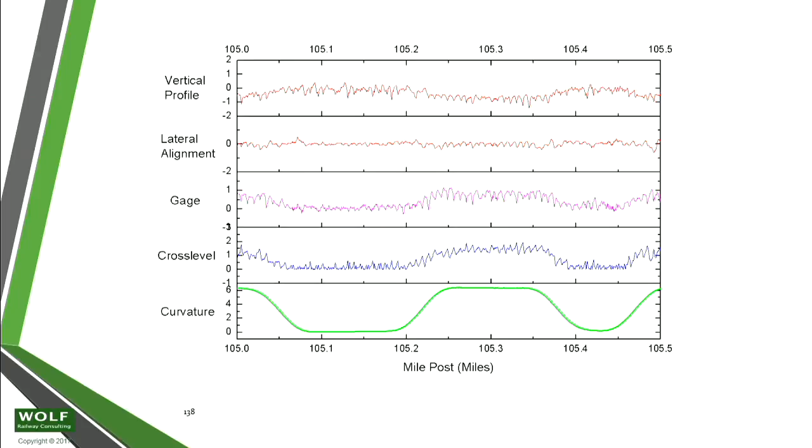The result of that would be a computer prediction of the track geometry — vertical profile, lateral, gauge, crosslevel, and curvature along the route — as our input data. We also have to develop our thresholds, characteristics of the probability of wheel climb at a given spot based on the Nadal equations, or the probability of rail rollover along the track based on rail cant, lubrication, fasteners, unloaded delta gauge, and all those kinds of parameters.

So we need to come up with our thresholds, at least in 10-foot increments, and then we would simulate L/V ratios to either predict extreme risk or high risk along the route. So these would be an example of setting up our threshold barriers and say, as we move down the track, we need an L/V for wheel climb over 2.0, but in this area, for some reason, it's 1.5. In this area, it's 1.75.

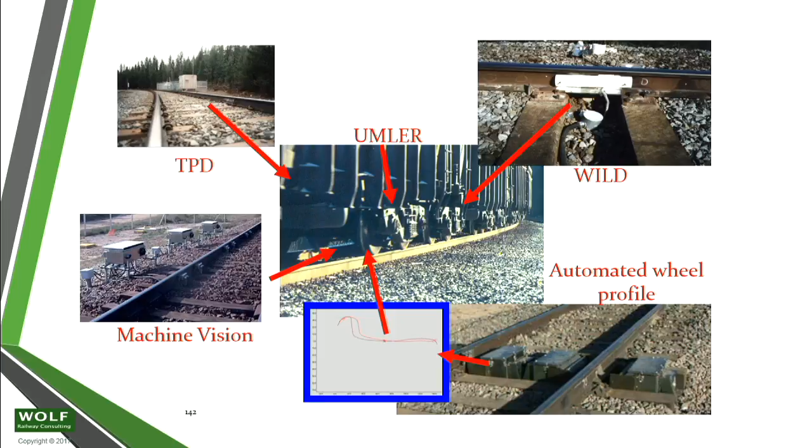So we would essentially draw a line along our track structure of our thresholds and then compare the predicted results against them. On the vehicle side, we've got all these data points coming in from machine vision, truck performance, WILD systems, wheel profile systems that characterize our vehicle fleet out there. So we can use this data as well, and put them in, I won't waste time on here.

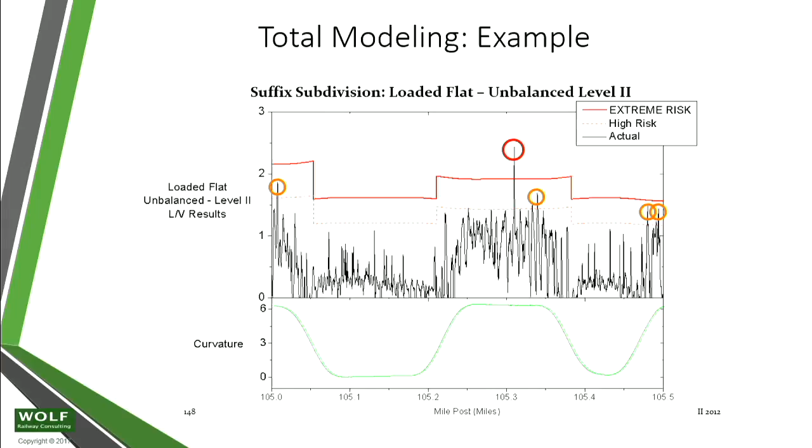I just want to show you the net result is this. So we have a predicted threshold along the route of wheel climb, and we have a predicted applied L/V along the route, and it's pretty okay along in here. We see one place here where we have a high spike. So we have some low-risk areas here where we're exceeding a low-risk threshold, but then right here we have a very high risk. So that's an area that would need a message alert sent out, a high-risk area that needs immediate remediation. The other three areas just might need to be tagged for planning down the road.

And I'm going to skip a couple of these and get to this final slide. I think I've got just a few minutes. Yep, 2 or 3 minutes.

How to start? I would say if you're going to do this, start small. If you're in the passenger business, take a route, or if you're in a captive fleet, take a particular territory. Just start with track geometry car records and maybe 5 car models. Don't try to do this all at once—it's the old saying, how do you eat an elephant? In small bites, okay? You're not going to swallow the elephant whole here, but if you're going to start this and start looking at it as a tool, start small.

Take one territory, just start with track geometry. Don't worry about rail friction, rail cant, profile. That can come later as you get more experience. And then maybe start with a couple car types, a flat wagon, an ore wagon, a passenger vehicle, whatever you typically run. Start with your track speed limits as they exist.

Assume some nominal drawbar force inputs. If you don't know what the drawbar forces are, start with 50,000 pounds, okay, along the route. Just say, okay, assume we got 50,000 pounds. At some point in the train, you will probably have 50,000 pounds on a typical train. So apply this data, assume some typical values if you don't have what's missing.

You know, I was always amazed by young engineers. I hired a bunch of them over the years, and they come out of school, man, they can run spreadsheets and everything, they're whiz bangers. But then you give them a problem to solve, and they come back and say, well, I don't know what the friction is. I said, well, assume something. Well, what do I assume? Use your brain, okay? Young engineers need to understand it's not what you know, it's what you don't know and how you get there, okay?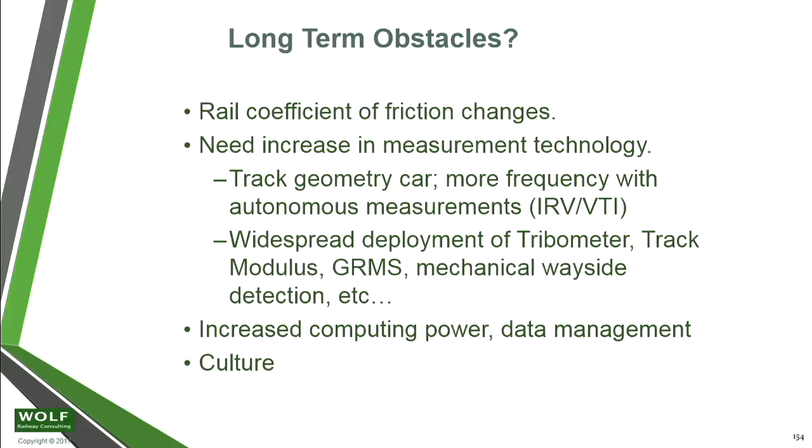And finally, we need to think about our culture, a change in how we look at this stuff. We need to quit worrying about finding—don't tell me I got a problem—and move to the culture of, yeah, I want to know where I have a problem so I can prioritize its maintenance to eliminate the risk of derailment.

So to finally say, I think there has to be a better way. This is a picture I shot about a year ago. I was told to inspect some track, and I got in the truck, and we're going down through the weeds. I'm going, what the hell am I doing here? There's got to be a better way.

I think at least we can start thinking that the purpose of my talk today was to ignite an idea in you, that maybe we can start moving from a strictly regulatory condition-based system to more of a performance-based approach, looking at how actual rail vehicles and operating regimes will perform over those perturbations in the track that aren't being flagged now, but could have an underlying risk factor associated with them. So, in the end, we hope to reduce accidents like this by using some of these tools and techniques.

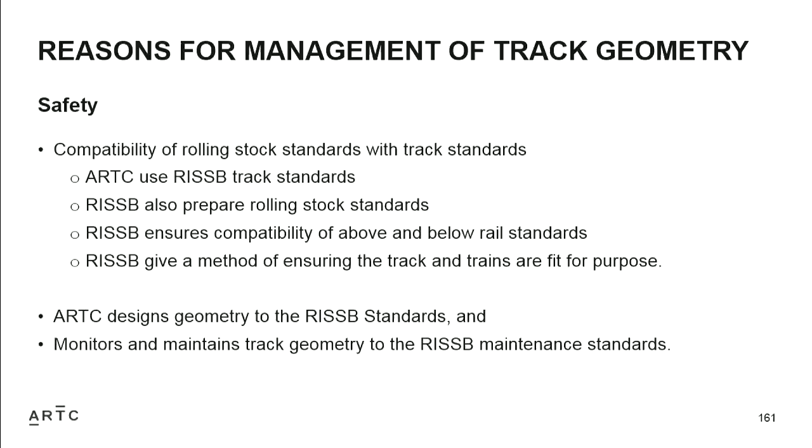So the first thing is the application of safety, and in Australia the way we've tried to approach this is to get engaged with RISSB and be involved in the development of the track standards that the industry takes on board. Obviously the rolling stock standards, the wheel rail interface, and also align our code of practice with the RISSB standards and basically adopt the RISSB standards. But once again, these are safety standards, and Gary pointed out this morning that by itself doesn't always guarantee safety.

One of the other issues is ride quality. We get a lot of press in Victoria about ride quality. We meet our safety standards for our railway, but in terms of what's acceptable ride quality and how it deteriorates over time, we're currently running around with several of the ENSCO VTI units fitted to some Pacific National locomotives that are providing us data on the track. With that data, it's helping us pinpoint areas where there are high accelerations, but in terms of having actual limits on that acceleration, it's very hard to say what should be the level that is unacceptable.

We have a track geometry car going around, but when the VTI unit goes round, it may not always show a fault at the same area as the track car, and the variation in the level of the fault varies sometimes with speed and other conditions. So it isn't a simple matter just to say there's an easy threshold for your figures.

We've got several of our coal trains in the Hunter Valley that have got the Monash system fitted to them, and we're analysing that data in that closed system. But I get more concerned with our interstate network where there's a wide variety of rail traffic. It's not a closed system. You often get offset loads and the condition of the track varies significantly.

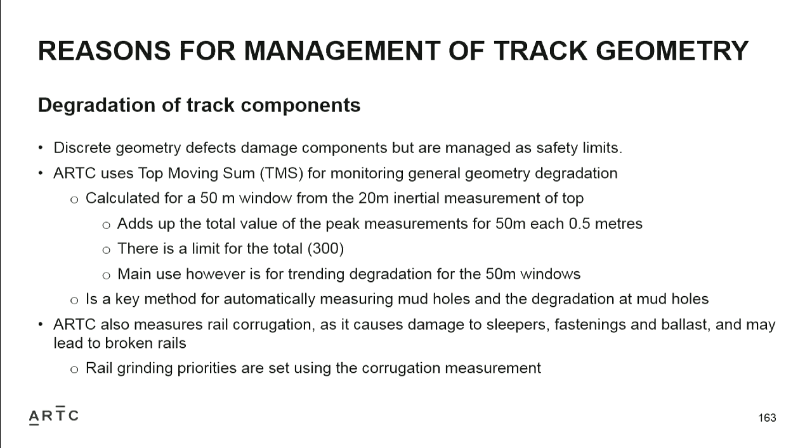So in terms of initiatives for improvement, we want to try and align what we're measuring on our track geometry car to get alignment with the VTI data. As I said, when you map them against each other, they don't perfectly align. We also try and get access to alternate standards. We subscribe to the Network Rail standards in the UK, and we keep abreast of what's going on there. We also try and look at what's happening elsewhere in Australia.

Some other rail infrastructure managers are very free, like us, in putting our standards out on the internet. Others keep them behind very closed doors. So I'd encourage all rail infrastructure managers to make your standards available to the rail community. I'm finding there's some good stuff with PTA in Perth, for instance — they've got some good recent work they've been doing. So certainly look at others, and I encourage you to make them freely available.

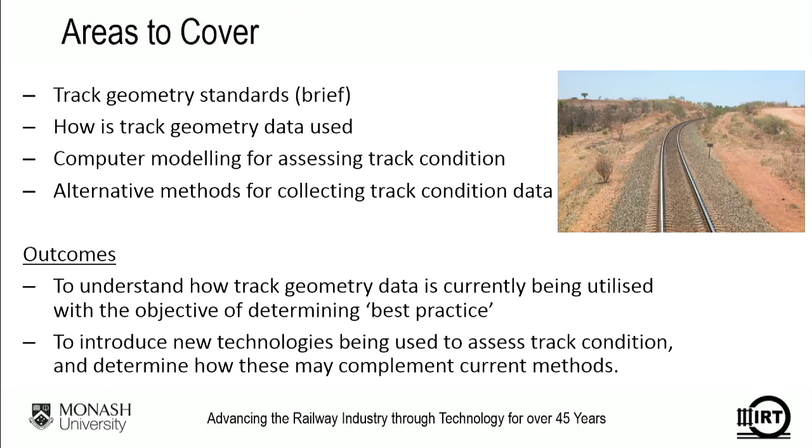All right, I wanted to start with a bit of history. In 1986, I wrote a paper for the Heavy Haul Conference in Vancouver called The Application of Computer Modelling to Track and Vehicle Maintenance Practices. It discussed the development of a model to optimise track maintenance planning. You wanted to look at track deterioration rates - you wanted to know when should I go out there and tamp my track. The model was developed in conjunction with Mount Newman Mining and Hammersley Iron. They were really keen on wanting to understand: when should I go out there and maintain track? Is the current standard too good, or is it not good enough?

Now, this is what we wanted to do. This is 30 years ago.

The question is, how far have we advanced and what are the major reasons that we have not achieved this objective? Does anyone believe they're actually doing that right here and now? Do they have any idea what optimum track might look like? How it might be measured? Interested to know.

And certainly 1986 wasn't the first paper around talking about this stuff. There are a lot. So what did the model try and do?

The cost of running the railroad was in part related to the condition of the track. That I don't think is an unreasonable statement. In this case, what is the optimum track quality? What's it depend on? It depends on how quickly that track's deteriorating, the types of vehicles running over it, and the maintenance. What are the costs of operating that railroad? How effective is your maintenance going to be? All of these things are going to determine what the best looking track is going to be.

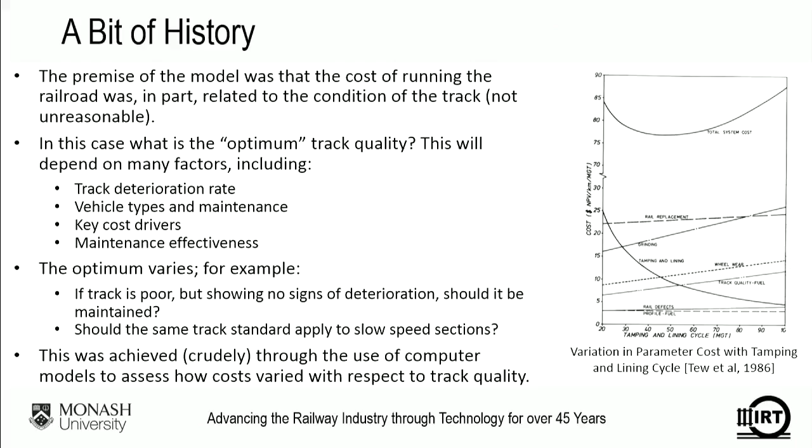And so we wrote a model and we were pretty proud of it at the time. Well, I was proud of it at the time. Trouble was, why did it fail? We never managed to implement it.

Reasons being, computer systems were inadequate to store the required data. Back then, in 1986, computer systems were pretty fledgling, and I've listed a bunch of information for every 400 metre track section. We wanted a whole bunch of information to be stored away. What's the chance of that happening in 1986? What's the chance of that happening in 2017?

Point 2: the ability to maintain accurate data for each track section across the rail network was limited, particularly if required in a single database. Now, I don't suppose railroads these days would have a bunch of Excel spreadsheets sitting on individual people's computers, not necessarily linked to a main database somewhere, would they? They'd all be in Ramsas or, you know, just wouldn't happen these days. Yeah, right.

So can we actually achieve this type of stuff? The bottom point there: track geometry data was not collected frequently enough, nor with sufficient repeatability to allow track deterioration rates to be established. So there was another fundamental flaw in the model. We simply couldn't get enough data into the model to try and optimise or to predict track maintenance.

And forgetting about scheduling of your tampers and all of those other things that you would obviously need to do. You're not going to say, I'm going to optimise this section and do it every 32 million gross tonnes and that section every 45 or whatever it might be. But it was the start of what seemed to be a reasonably sensible process. But, you know, is it reasonable? I mean, do we need to understand this stuff, or are we happy with what we've currently got?

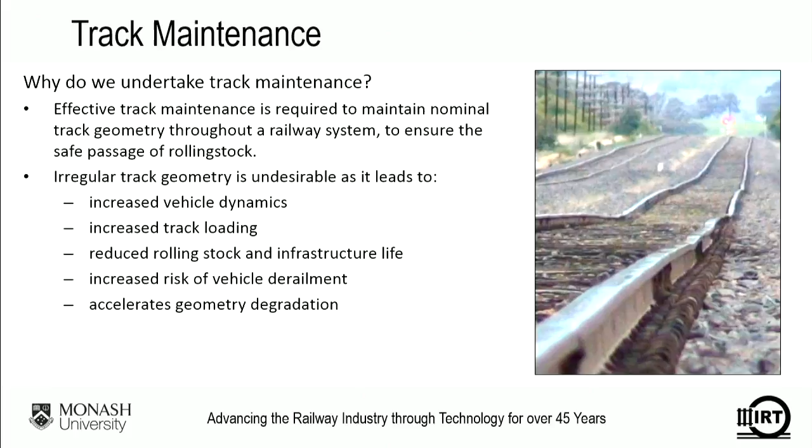So, again, to pose a question: track geometry recording cars have been around a long time. How many of the organisations here today are in a position to trend track deterioration with their track recording cars and use it for short to medium term maintenance planning?

Good. What sort of time frames are you looking at for projecting forward? Okay, with a frequency of recording of? You think that's good enough? No.

Yeah, okay, so again we ask the questions: how often is the data collected, and how does the frequency of data collection compare with the maintenance planning horizons?

Lots of track recording cars are run every 4 months. Is that good enough? It depends on your track deterioration. It might be 6 months, could be 12 months. I think the most frequent I saw was perhaps in the US on high-speed lines, where they're talking about 2 weekly. Numbers like that, whether that's right or wrong.

And then the fundamental question: is track geometry data in its raw form, or depending on how you choose to manipulate that data, a good measure of track condition? Not sure. It's one measure - any information depends on what you do with it.

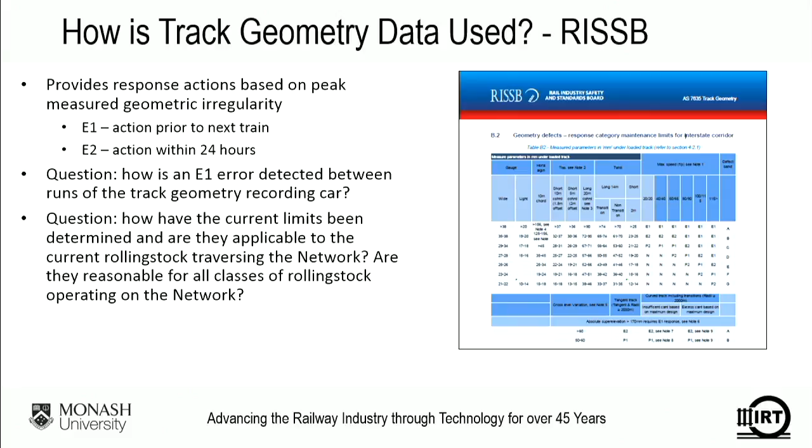I asked the question. ARTC, and Phil's already touched on it, very similar to the RISSB standards. I tended to pick up the tolerances may be different, slightly different to RISSB, but it could come back to things like the chord lengths of measurements might be slightly different. I wasn't sure, I certainly haven't drilled down into the standards, and for those people who are here, please comment if my understanding is wrong.

Use track geometry calculations, standard deviations over 100 metre lengths, not uncommon. TQI distributions calculated, and I think again they're just effectively - you want to have your bell shape or your distribution of track to be better than the specification that you've got in place.

One of the things that it did appear to talk about was the repeatability and the measurements and the accuracy of the measurements. Phil, I'd be interested to know how you go about assessing the repeatability of your recording cars, because back through the 80s I've done four or five sets of repeatability trials on recording cars, and one of my concerns has always been how much variability you got. Now clearly systems are better now, or we hope they're better now, but it is very important that people chuck a recording car out there and have this absolute faith that what's coming back is correct. To me that is a really important step - to understand how good your car is and how reliable, especially if you're trending the data.

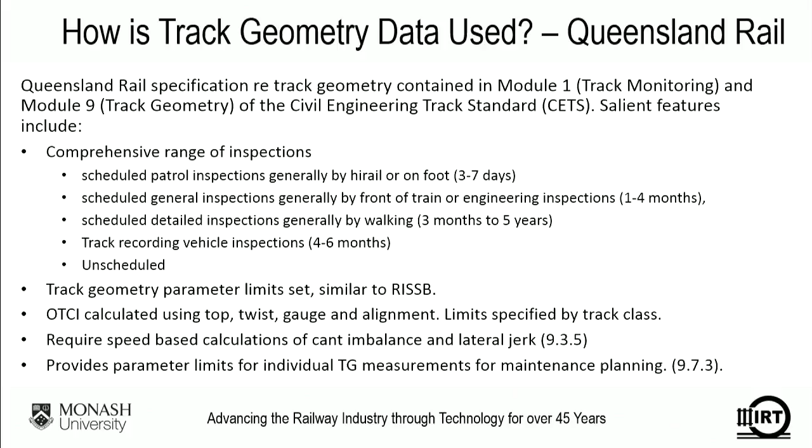You should answer your question, Graham, which is to say that OTCI, we don't use it to proactively manage track because it is very much seen as an average, but it is what's governed - we're contracted. However, the other ones in there, we have used them in the way you describe. You use your knowledge, yes. And seen a reduction from over 500 to almost double figures in the last three years, in terms of the twist, gauge, alignment - everything else is specified. So yeah, actually if you just challenge, that's the answer.

I had a brief look at a couple of the other standards. EN 13848 is the European standard. It looks at each of the individual parameters - gauge, cross-level, twist, surface, alignment - and provides guidance on resolution and measurement uncertainty. I've recently been doing some work on a new Mermec machine, and again it's very much driven by some of this type of information, in terms of when you're doing the repeatability trials to look at how good the data is. It also requires you to look at the different frequency bands. The criticism we make of standard deviations is that it lumps everything - it doesn't really tell you anything about the dynamics of a wagon. But if you start to do spectral analysis of your geometry, at least it can start to tell you whether it's feeding into the critical wavelengths of your wagon from a response perspective.

And I'm not sure whether anyone here is really looking at frequency content of the geometry to any great extent.

Combining standard deviations suggests calculating standard deviations of combined parameters. We talked about combinational errors, and they actually hint at adding—this is my understanding—you add your alignment and cross-level errors, or maybe subtract them, I'm not sure what the best combination is, and calculate a standard deviation based on these as another measure to try to understand combined errors.

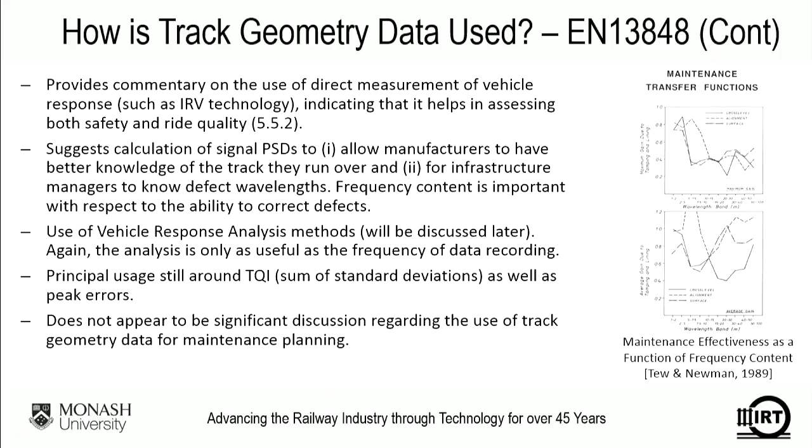Certainly the EN's talking about it, AREMA's talking about it, and we've actually got a project on the go at the moment in Indonesia—we're doing this exact piece of work. I'll have a slide on that in a moment. AREMA, and Gary, you should probably be talking about this, and you may do later.

I just touched on a few things. When looking at track geometry data, consider individual parameter thresholds—peak errors—multiple thresholds, where more than one defect exists in a region, and repeat defect analysis: have we seen this location before? Do we need to prioritise alternative maintenance strategies? Well, I suspect a lot of people in the room have that latter problem—we'll send the tamper out there next week, so on and so forth.

But the other thing they comment on, and they actually put a plot in there—and again, we've been talking about this today—is track response, so that's wheel L on V up there, but there is no significant geometry errors leading to that high response. Gary's just given us a whole bunch of examples of this. This is now being talked about in the AREMA standard to say track geometry isn't necessarily the be-all and end-all of monitoring or assessing your track condition.

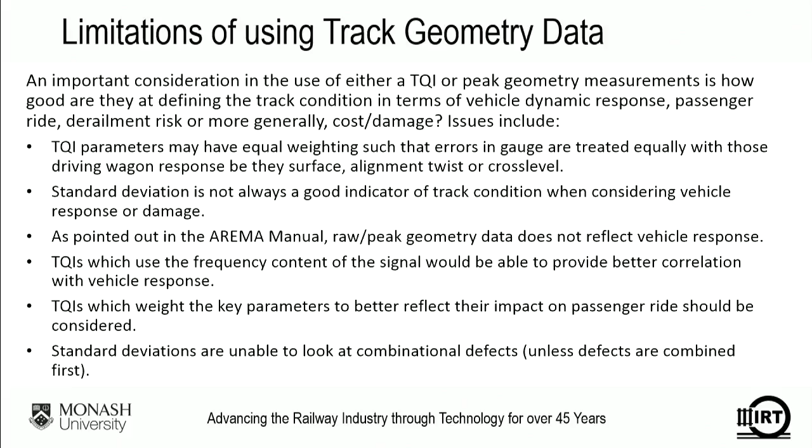I don't necessarily want to run through all of these, but there are limitations, and I think we probably all accept them. Have they provided the railway industry with a great tool over many years to provide a lot of good data? Absolutely, no question about it.

There's a lot of models around, and I'm not going to spend time talking about the different models and the pros and cons, but simulation models - geometry data is really accurate at telling you where the rail is. Shoving a vehicle model on top of it allows you to understand exactly what's going on with a whole range of different classes of rolling stock.

Again, we all use them. They allow us to do derailment investigations, assess track qualities. They're still limited by the frequency with which we get the track geometry data back into the model. But they're a very powerful research tool. You can run 20 different classes of rolling stock over the same piece of track - your high-speed passenger and your coal wagons - with all the right cants and supers in there, so it's a very powerful tool.

This is the one we were talking about before: predictive modelling. You actually measure track geometries together with the rolling stock response, develop and validate predictive models to determine the response of the rolling stock to various track conditions.

One of our chaps here is actually doing a lot of work in this area at the moment. What it means is that you can effectively put one class of wagon out there recording data - having one instrumented wagon out there will measure the condition of the track. You can then tune your algorithms for all of the different classes of rolling stock running on it, to understand how they are likewise going to perform over those same sections of track.

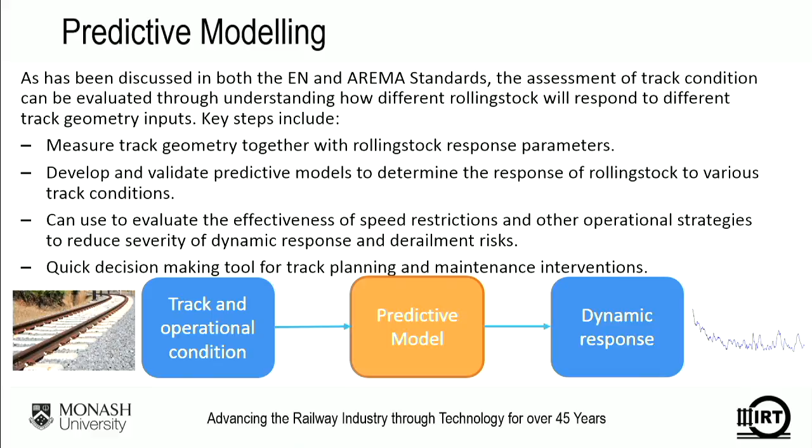We're actually doing this work under a grant arrangement between the Australian and Indonesian governments, in Surabaya I think, on their track there. We've recently been over doing some instrumentation, and we're going back to permanently set up some instrumentation and further develop these models.

So again, it's another way - we talk about the fact that we're going to run multiple different wagon types on different pieces of track, and then we say, well, that means we need 10 instrumented wagons or 20 instrumented wagons. Well, if we can set up the instrumentation on one wagon that can then be continuously monitoring, and feed that into other classes of rolling stock, that becomes an incredibly powerful tool in our view.